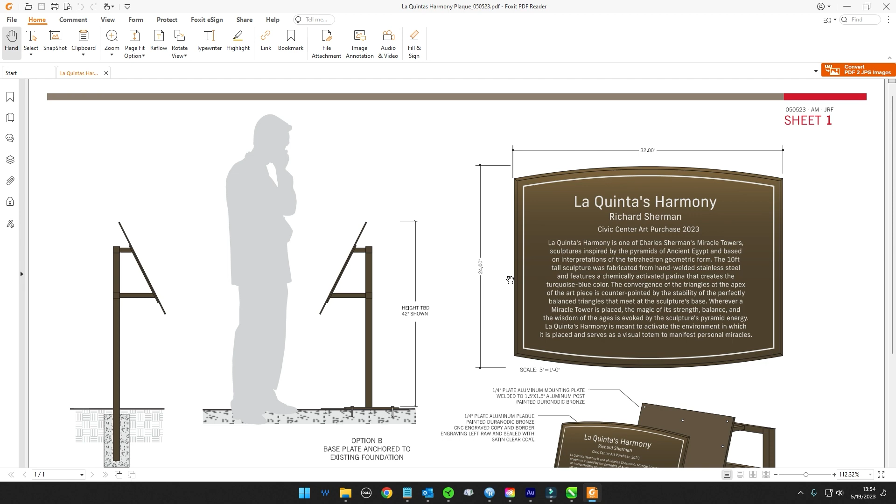So essentially I was given the full size file. What I do is look at our permit drawing to make sure all the numbers jive. I confirm things like our news media used to do, with at least 2 or 3 sources to make sure things are proper. So I got 32 by 24 on this thing. They want it to be 42 inches high. It looks like some kind of frame and something that's going to mount after it's painted, probably using some screws from the back.

I'm thinking 10 24. So I look at this first, and that's why I asked for a full size to be given to me by the designer. JR does a good job, he actually takes the PDF and gives me that, and it's to scale and all that, and I work in 1:1. So he takes this and full sizes it for me to make sure everything jives.

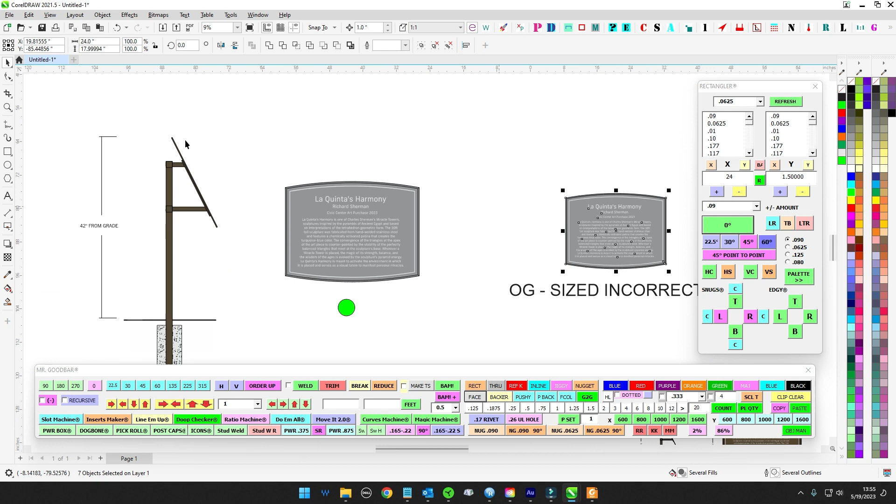So then what I do is take the full size and check the X and the Y, and go against it to verify, like Reagan used to say, trust but verify. I check to make sure the written numbers jive with what I see on the full size. This time, this was a little too small, this was 24 by 18. I'm seeing that it's supposed to be 32 by 24. So I went and asked him, and he said yep, there was a sizing issue. I checked that this was 24 as well, so I think we wanted it to be 24, but it wasn't. So again, asking for a full size that's verified, I can double check against drawings, versus if I'd just taken this drawing, who knows.

In this drawing, you can see this is still live text, and I might not have this live text. So that's why I want all my text to be flattened. I want it to be all curves, because that way I don't have to go find that font if I don't have it.

So anyway, now that we're here, we're in my play space, my workshop. I'm at 1:1, I have all my nudges, this is my default. So I copy pasted it out of the file he sent me, and I'm ready to get cracking. So I'm going to take my exporter here.

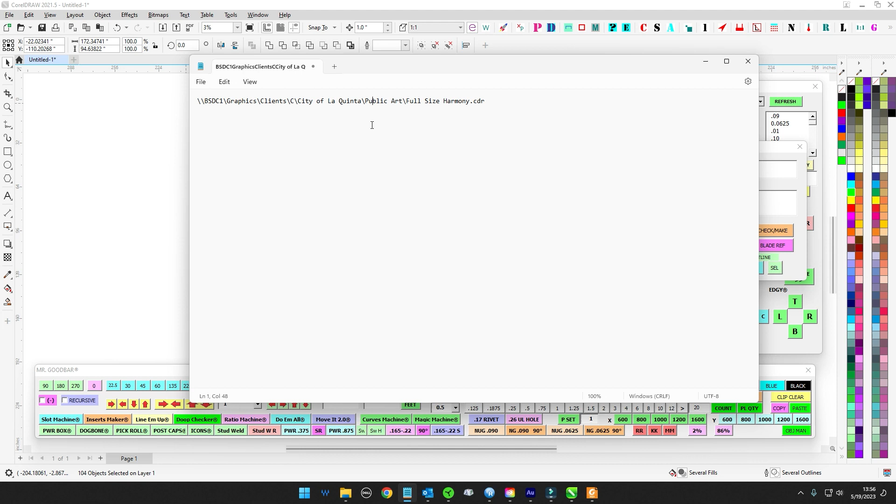Now I always keep Notepad pinned. We send each other hyperlinks of where the file is on the server. So I just copy paste that hyperlink into my Notepad. Notepad's awesome as a landing spot, a landing pad if you will, for copy paste, temporary quick stuff. So I'm going to go ahead and pull the file name, pull the job name out of this, just this simple.

I'm going to copy this and paste it right here into my exporter. And the exporter then, I'm just going to get rid of that, I don't need that. So now City of La Quinta Public Art is going to be the file name, part of the job name, and then this is the description of what it is. So I'm just going to call it Harmony Plaque, keep it lowercase, and use underscores for that part. Then I'm just going to hit save CDR and that's going to name it. So you can see, bam, it's saved and it's popped up into my homework file here.

So it's all saved, City of La Quinta Public Art, Harmony, and it puts all the date and everything on there. So that way we're good to go. I've got a video of this already if you want to watch it, but we can go over that some point later. So export it home, so now we're all set.

So now what I'm going to do is leave this as the page of record, so I know what happened. I've got this right here, I can always refer to this later, kind of like a non-destructive undo, but I'm just going to leave it that way so nothing changes.

So now I'm just going to take what I need. This is all I need here. I'm just going to copy it and paste it forward. I'm going to go to the left here, make a new page, and hit paste. So now we're good to go, and I'm just going to kind of work from here.

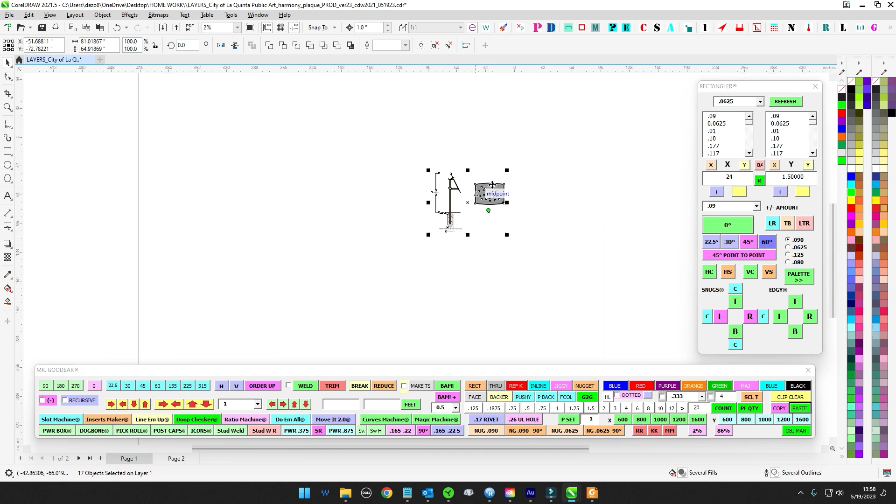First and foremost, I'm going to grab a fresh version of this that doesn't have all this stuff on it, because I don't need all of this right now. What I need to do is just dig out the main piece here. So I'm going to copy that and bring it over, and double check its size.

It's 31.9997, which always drives me crazy. And what I also like to do, since I'm working with somebody else's stuff, is double check the calligraphy. I have my properties docker here, and if I select this, I see that the calligraphy is actually set to 67 instead of 100. So I like to get that nice square, and it helps things when you switch it over to like hairline.

So I also like to work with a hairline here, so 0.03, and I like to get rid of any dash dot, whatever, so kind of clean up what they had. And I want to make sure that this is 32, so I'm going to switch that to 32, not 23. There you go, so 32 by 24 exact dimensions really helps out.

So now that we have that set up the way I like it, just keep hitting save, got to remember to hit save. And so now what I'm going to do is bring this down to here, and then I'm going to take this.

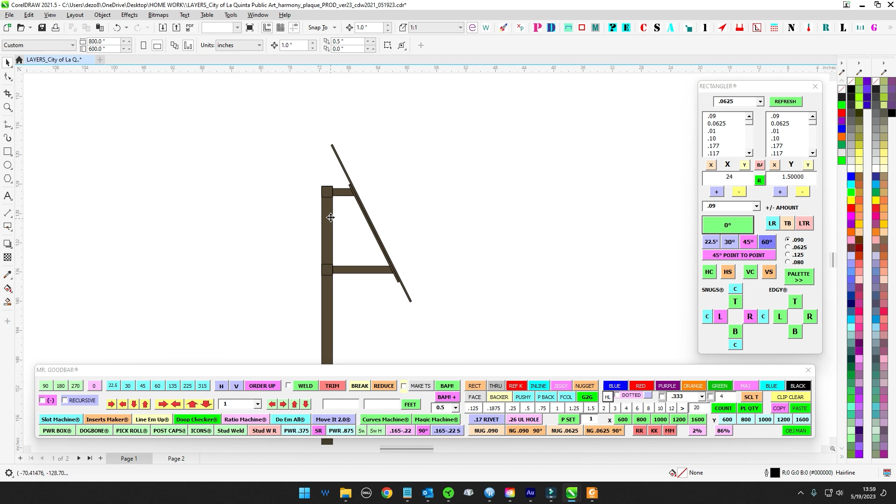And I'm going to recreate this, but I'm going to do it with my hairlines, with my stuff. So what I'm going to do is take this guy - you can see where, because it scales up, it gets kind of really funky, so I got 1.5000 whatever. So if I hit X and I hit Y, that gives me these, and then I can go ahead and clean that up over here on Rectangler, and then I can hit Y, that gives me 50, and then boom.

So I'm going to make this blue, we're going to make the frame blue, and I'm going to go ahead and put that there. Actually, you know what, we're going to get rid of that. And then now I have this, so that's 1.5 by 1.5. But if I just get rid of this and hit this, I get a square at 1.5, so I'm going to do that, hit blue.

And then I'm going to send that to the top and to the center, and then get rid of rubbish. So there we go. And then if I hit this guy here, how far is it? I can see that the Y dimension on center of these two is 10.599.

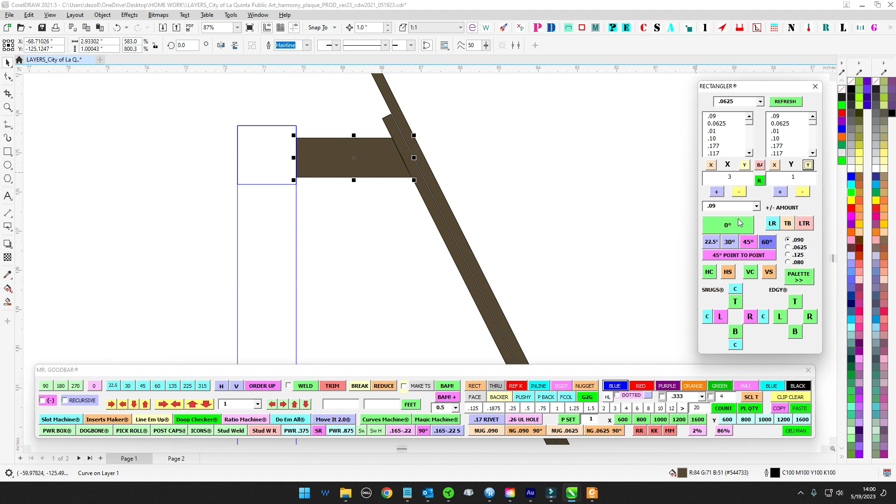It's kind of sloppy, so what I'm going to do is recreate this guy. So we've got 2.93, so I'm going to just hit X and Y, clean that up. If I hit the Y here, it cleans it up to 1. If I hit the X, it takes it to 3. So now I have nice even numbers, a little stick here.

Let's go ahead and make that purple just for differentiation purposes. So I'm going to get rid of this, and I'm going to go ahead and put this in the center of this tube there. And now you can see where that's kind of where we want that. We're looking good there.

Now what I'm going to do is take this and center it up. Actually, we're going to do this one first. I'm going to run this down and get even numbers. I like 11 - 11's a good number. I don't know why, but I want 11. I like putting 11 in some of this stuff. So we got 11 on center.

So I'm going to copy this, bring it down, because I'm going to be trimming this anyway, so I'll just extend this out. Just like that. And hit save. There we go. So now I have these two verticals. These are at centers on 11 each other. We're coming out this way. We're looking good.

And now that we have this, I'd like to know what this is right here, whatever this is. So if I just draw a line there and hit Curves Machine right there, we can see that that's 0.99. That distance right there is 0.99. So we're close, obviously close to an inch. So what if I were to just poke this up an inch that way? We do an inch this way - looking good there.

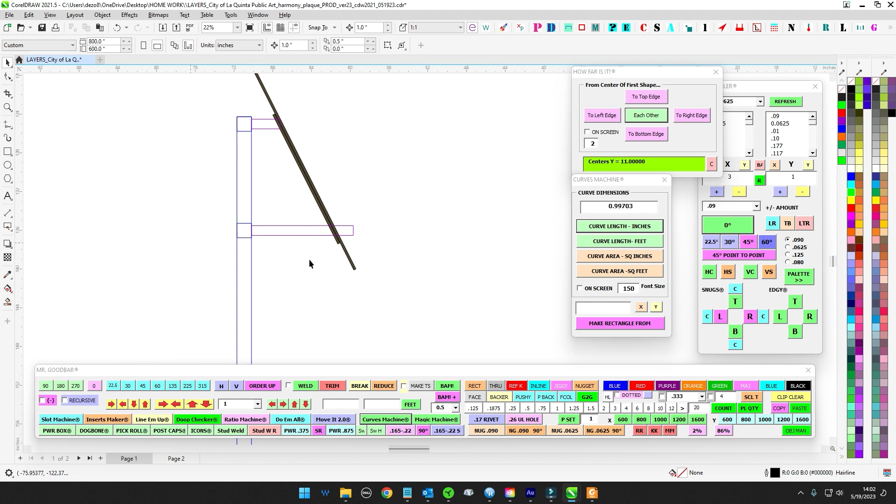So now we need to transition, because now that we have this built more to even numbers, everything's kind of nice and even. So this is going to be 3 inches in from there, and then this will be whatever this is. At some point one of them has to win, so you're going to have either a funky number here or a funky number there when you're dealing with this.

Now speaking of funky, I guarantee you this is going to be at some weird, strange angle. And if I look up here, it is 26.75. Again, we're all about making things easier in the back shop. The chop saw you get has demarcations for each degree, so the chop saw is not really good at doing fractions. You can't go to the space on a fraction.

So what I like to do is take that and even it out so it's easy to work with. So we know we have our real size here. We need to make this actually be 24, and then we need to figure out what this piece is going to be next. So what I like to do is grab this - thank you for your service, don't need you.

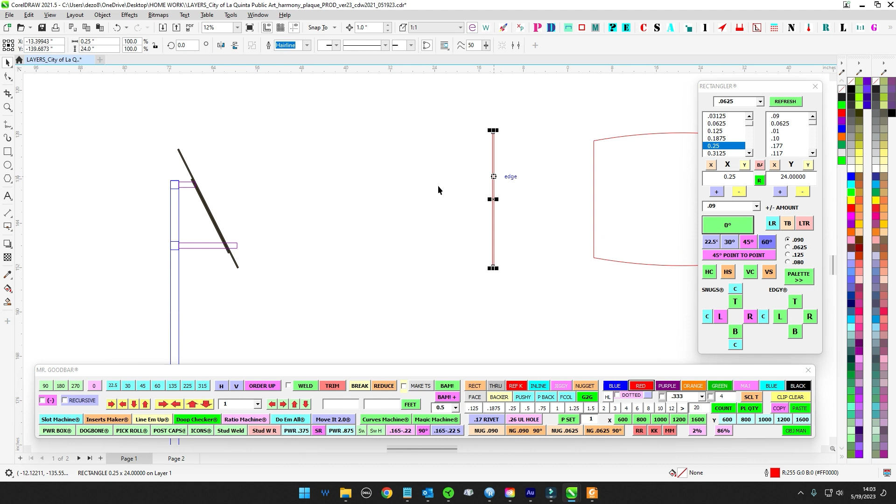So I hit Y, that gives me 24. I scroll down here and I get 0.25. So this will be our side profile in red, and we can just even that up. So now this needs to go here. So let's check this degree.

So we have 26.75 degrees. So what I like to do is grab this and then hit my go time here, I hit my degrees - this is my minitator. This is a rotator machine that just keeps this loaded up, because when you're dealing with rotation in Corel, you have to retype up here like an animal all the time, and it only goes counterclockwise.

So if you go 26, then that's fine. If you want to go negative 26, you have to actually type negative 26, or do math - 360 minus 26, et cetera. Whereas the minitator here, you just load this up. So I'm going to type 26, and now it stays that way.

And now I can go left or I can go right, just that easy. And then I can either do everything all as one, or if I have a bunch of things, they will rotate 26 degrees on their centers - so that's kind of cool. Let's say I want to take this - if I select this all as one, it rotates as one, versus if I do it like this, each one rotates on its own center where they are. So a little bit of undo there.

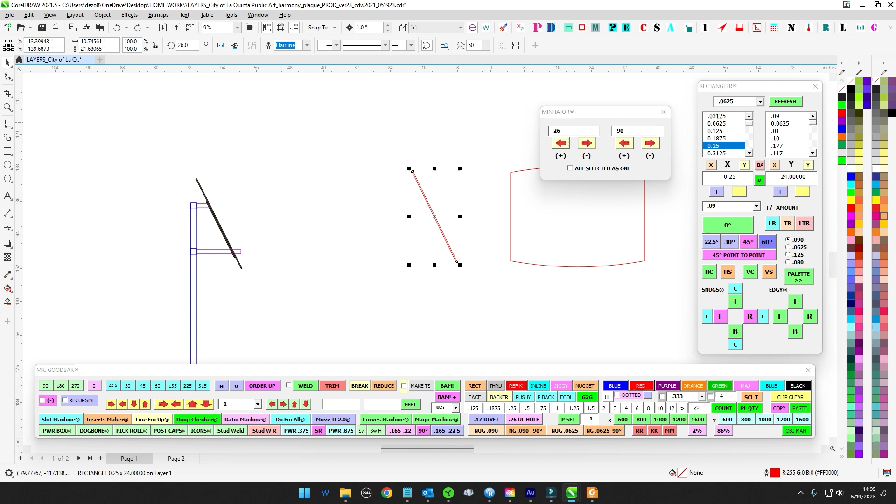So there you go. So now that I have this set up for 26 degrees and it keeps it even, what I like to do now is I can do Launchpad and type in 26 degrees. If I hit this little button here, that gets me a degree mark, and I'll hit go - that puts it on the screen for me. So now, even if my minitator closes or whatever, I just remember that I'm at 26 degrees.

That's what I'm working with, in case this changes. I just know that that's 26 degrees. Okay, so now that we have the real size of this at 26, we need to match it up to what's existing and get rid of the funk. That way we can get these set, get everything lined up, and get screw holes lined up and make this plate, lay it all out. So now what we're going to do is a base plate.

Let's do the base plate next. Now that I know we're at 3 inches here, let's copy this forward, get it out of here and get it cleaned up. I know that this is where the base plate wants to be. So what we're going to do now is grab this, all selected as one. Let's go over 26. There we go. And now what I can do is get this out of the way.

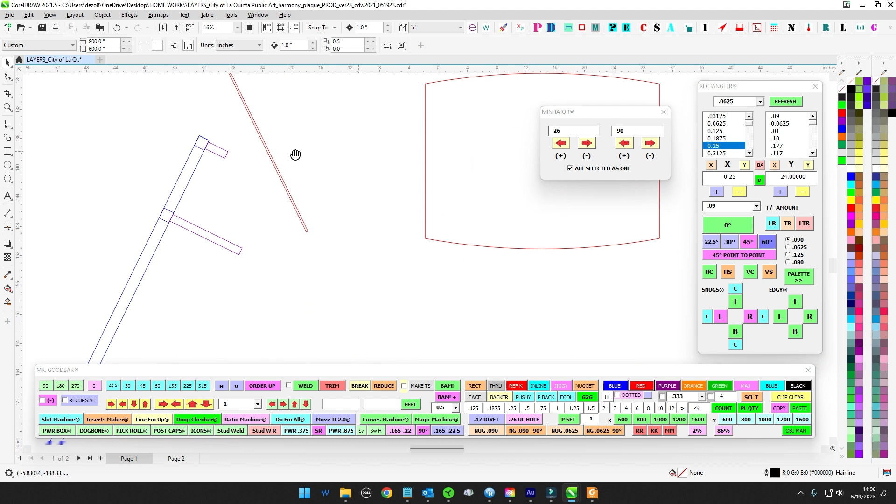Since we know we want to go 1 inch further up from here, actually, you know what, we want to trim this. That's what we want to do. So we want to take this and make like a little trimmer thing. We want to go 26. That's what we want to do. Go like that, bonk it right there.

And then I'm going to take this. Actually, I want to do this at the node, much more accurate that way. So I'm going to take this, I'm going to trim it. There we go. And then I'm going to take this and bonk it like that up against there. And then I'm going to take that and trim it. That's what we want to do. There we go. So now this should be 3 by 1.

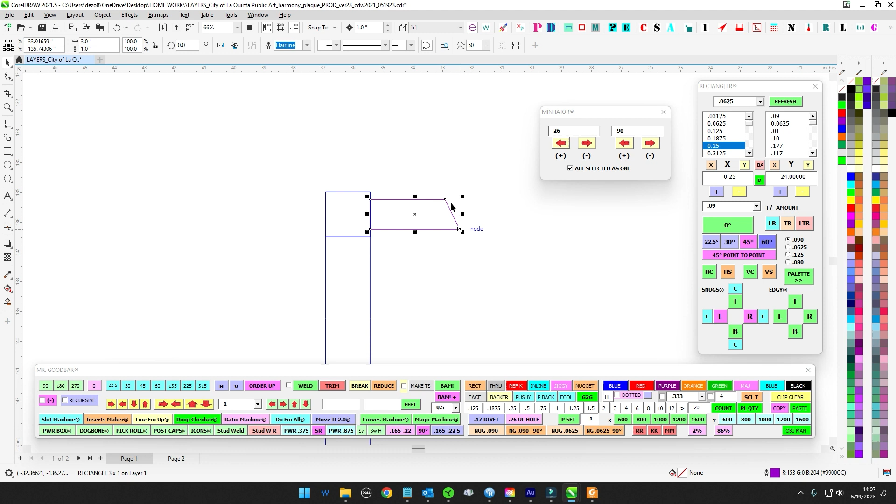So this measurement right here will be nice and easy for fabrication to start with. They can cut this at 3 inches to the long side and then just go 26 degree cut on the chop saw. We're set up for success. This guy here is going to be .36, so we're very close. You could just say shy 3/8, and that's going to be good enough for what we're doing here, because once we weld it, it's all going to be fine.

So now what I can do is group this and we'll tilt it over. Now we can make this plate because we have that size. So I'm just going to reuse this and put it right there. Click.

Make sure you've got your constraints when you're doing what I do. I was just talking to one of the designers at work. I work with the highest, like the quickest. You can see how far away my mouse is before it hits all the way out here. That's what you want when you're doing what I do. You want that Duplo blocks, the big Legos snap. You don't want to be waiting until it gets all the way here before you grab a node. You want to be able to be way out here. Look how quickly that grabs that node. I'm already working with this thing all the way over here. That's really important when you're doing this, because you just snap to, and you want to snap to as quick as possible. You can almost feel it pull over.

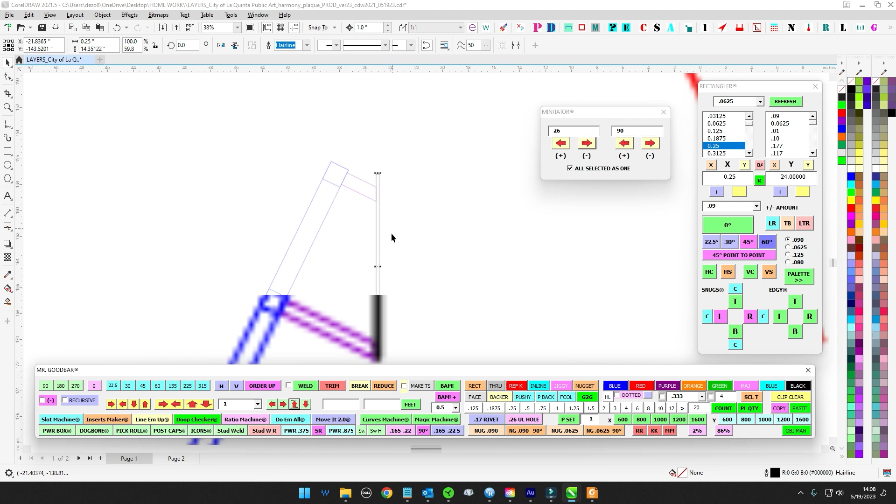So anyway, what I want to do is grow this by 1. We're going to go 1 inch up, and then 1 inch down. So now what I did is I took that piece, made it grow 1 inch. So now we're 1 inch from there and 1 inch down. So now we're kind of close to what we got here. And I'm going to make this orange just for fun. Okay, so this interstitial piece is orange.

So now we got this laid out. Now we can tilt back. And then what we need to do now is get this lined up with this where it is here to try to match that as close as possible, right? So what I'm going to do is group this. And this is where it's not going to be perfect, but we're back to 26. I'm going to get this lined up there, and I'm going to bring this out so I can just do a guideline.

And then I'm going to guideline here, and guideline here. Now I know that's not exact, but all of this is pretty close.

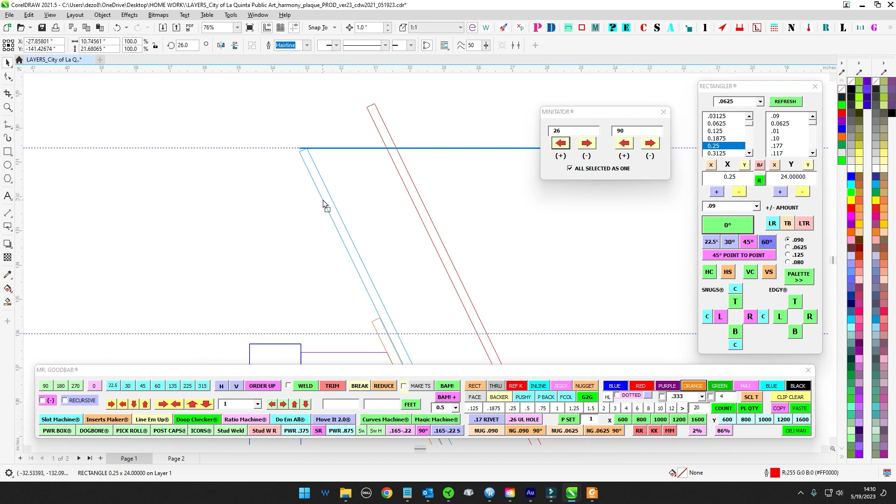So now what I'm going to do is take this and get it as close as possible, because it's really difficult to get that to slap against while it's moving. There are ways to do that, but I'm going to get it close, then tilt the whole thing and get it smacked against there. So I'm going to go like that. That's pretty dang close to where I want it.

So now I'm going to take the whole thing, select it as 1, tilt it back to 26, and then go ahead and go like that. Then I'm going to do a guideline like that, tuck it in. Now I have intersection. That's the size there.

And I'm going to go ahead and delete all my guidelines, get them out of the way. Then I'm going to grab this, tilt it back 26, and we'll see where we're at. So I'm going to line it up the bottom there. That's well within spec, it's looking good.

It's what we want, we have everything lined up. So now we come over here. And then what I'm going to do is get rid of that just in case, because we can always go back to it here. That's the old busted, this new hotness. And we've got all this we can always refer to.

That's what I'm talking about. Yeah, I know I just got rid of that, but really that was super redundant. Sometimes it can get a little too crowded if you're saving too much stuff. You become like a vector hoarder. Trademark, you heard it here first.

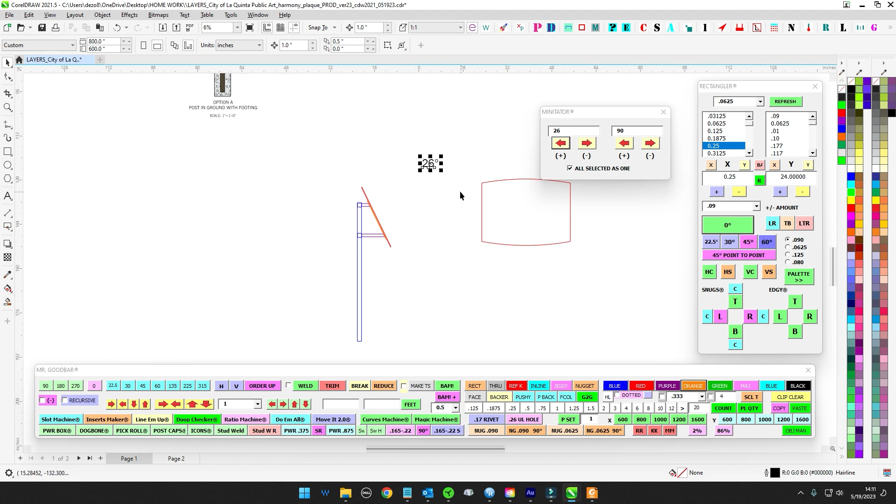All right, so now what I need to do is transition, because Corel only works like this, X and Y. When you're dealing with an angle like this, things are weird. So this is a different perspective than this. So I need to get this laid out X and Y on full size this way.

So what we do, simple enough, I'm gonna go ahead and group it and then tilt it back 26. And then we're just gonna line this up, since this is 24 and that's 24, we're just gonna line that up with the top of that. Just to make sure, I'm just gonna go ahead and hit top. Okay, so now this is lined up with that.

So now we just need to transpose this plate over to this plate, set up all our holes, and get a spot where these guys weld in, all that stuff. And then the next thing we'll be doing is our cut list, get a cut list set up for fabrication, get these all set up to route. So we're good to go.

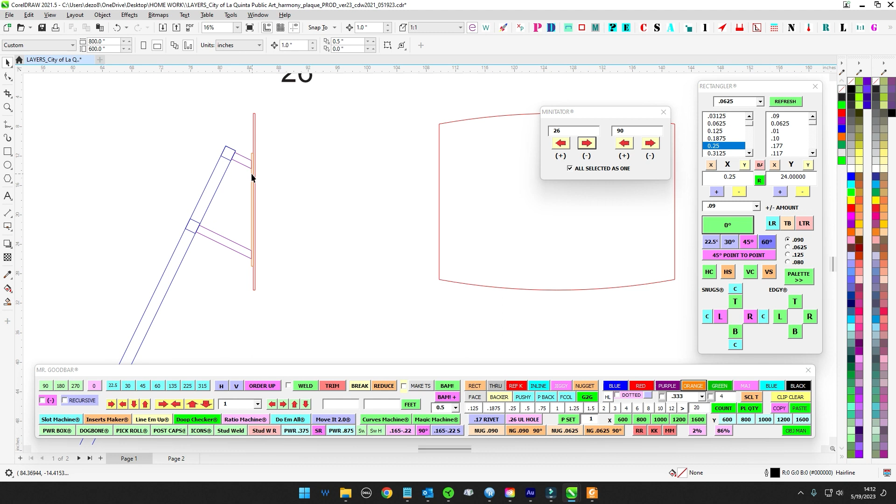So what I'm going to do is transfer this. I'm going to go ahead and ungroup this for right now so I can work with these. And I'm just going to be lazy, and just copy this and smear it across like that. Bam.

And then I'm going to clean it up with an X and a Y. This is supposed to be 32. I don't like it like that. So I'm going to do like this. We're going to center it with that, but then make sure we are centered with that. There, okay, so that's that plate.

I'm going to make it orange so it matches that. Actually, that's kind of close to the red, isn't it? Let's make this purple. There we go, good differentiation. See, I like to have that color contrast.

So what we're going to do is take this, and take this, and I want to see what this spacing is here, because that way this spacing can kind of go around. So it'll look like that spacing comes around and looks good. So how far is it from this edge to this edge? We're looking at 3 1/4 from here to here.

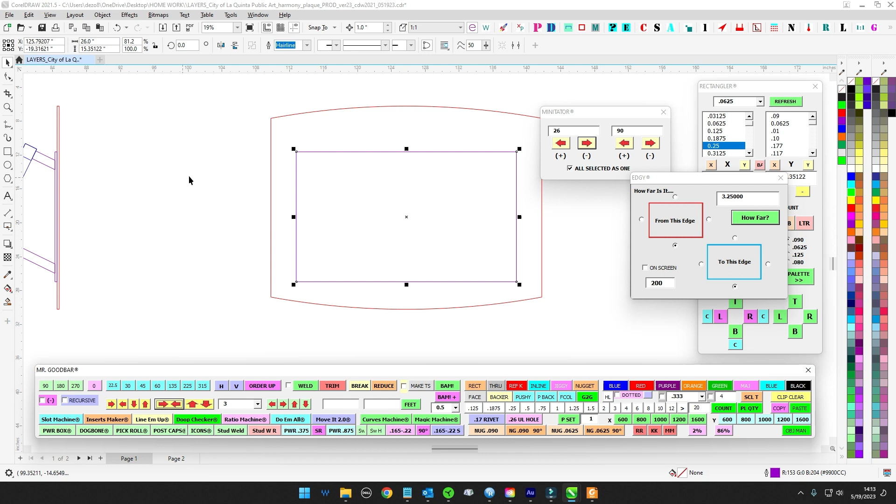That's looking pretty good. So if I were to bring that in, let's say 3. So what I'm going to do is shrink this 3, both sides. That will be my mounting plate. So you can see there it comes across here. I kind of like that. So it's sort of this and it comes around. I think that'll be a nice look.

I know other people are like, why don't you just follow the bottom, follow the bottom. It's fine. Looks good like that.

So now what we do is we need to transpose at this angle, this distance, because this is longer than 1 since we're cutting at an angle. I'm going to go ahead and transpose where these lie on there.

So what I like to do is take this, duplicate it, bring it over here. If you hit the word break, it'll break it apart. And now I just have this. I can get rid of this as rubbish. So now this gives me my Y, which is 1.1125, blah blah blah. And then I know this is 1.

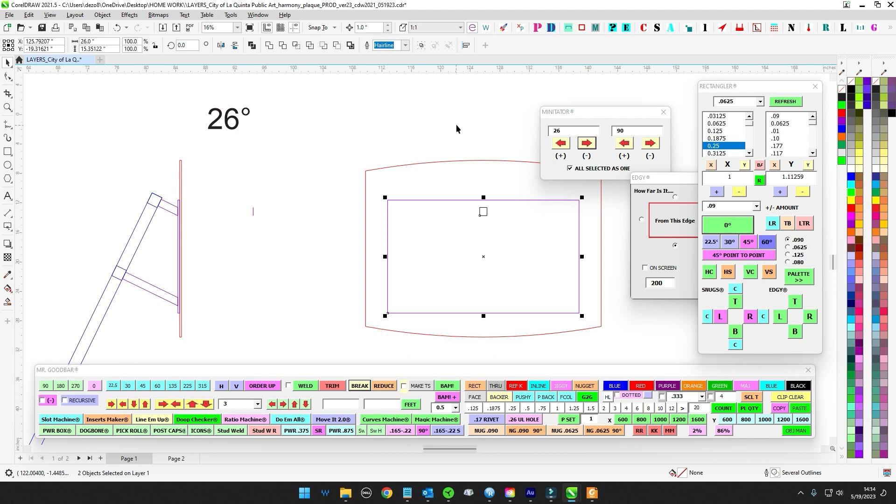So now I have the profile of this post here, right? And then I'm just going to center that up there. And then I'm going to just spread that out a certain amount.

Now I notice that they don't give me any measurements, but I see that these posty things here, that's a 1x welded to the 1.5 inch inside a little bit. So we want that kind of look, and we're going to go for that right now.

So we're kind of building up this frame as we go. I think 10 inches apart, we're looking good. So I'm going to go ahead and bring that down to match where this guy is. But let me do a quick match here with that. So boom, like that.

Line up, get with your buddy. There we go. Okay, so now this is where that post goes with the stretch because it's at an angle, and that's where those go. So got that laid out.

Save, save, save. No crash, no crash.

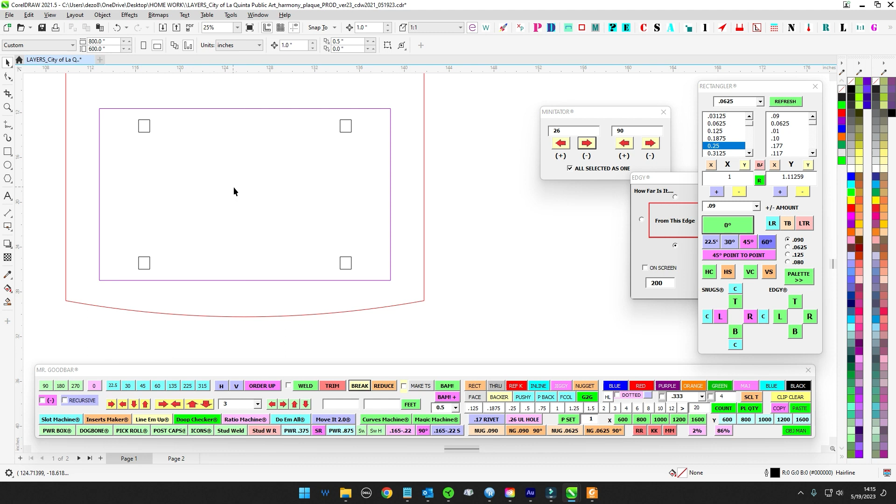And then this also gives us a good spot. We can go here for our screws for mounting this thing. Gives us plenty of space in here for screws to mount this. Whether we put some in the center, not sure. We'll figure it out, see what we got.

So now what we do is we want to kind of score this for that particular thing. So I'm going to go ahead and off to the side, make this thing. What I like to do is a 0.03 oversize, so that gives me a 0.03 bigger. It's basically a business card all the way around because no extrusion is exactly 1.5 inches or 1 inch by 1 inch. So I make that bigger.

And then what I do is I call a channel tag, that's what they call it. So I hit my channel tagger and we're going to use, let's see what a 5/32 looks like. Yeah, that's good. So we'll do a 5/32 bit.

So I'm going to go ahead and make sure that I pass that on to our route guy. So I'm going to make this red. And then I'm going to go ahead and do an inline because I don't want to spend the time to carve this all out. I'm going to do what's called an island fill. An island fill is when the router scores down and removes all of this material.

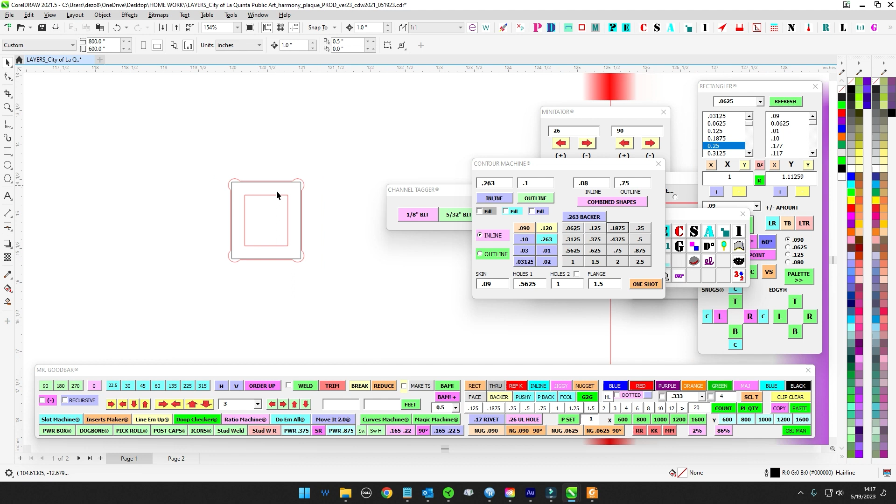But to save a little bit of time, I'm going to go ahead and leave some of it because we're just going to have a 1/8 inch wall tubing. So I'm going to do a 3/16 inline, just like that. And then I'm going to make that red as well. And there we go, so that is going to be my route down island fill.

Now I'm going to go ahead. Now, when you export in DXF, it breaks things apart anyway, but I'm going to go ahead and combine it now. And I'm going to give it this purple color right here. I like that.

So now what I'm going to do is just take that, duplicate this. I'm going to leave this in case I need it. Now I'm going to hit do them all. Getting a little bit crowded here. Thanks guys, appreciate it, don't need you. We'll keep you though, but we'll get rid of you. Don't need tagger anymore.

So now what I'm going to do is hit OG shape, and I'm going to hit these as copy onto. I'm going to go apply to all shapes, and that's going to give me on center a copy of each of those. So we're good to go. I'm going to save that.

So now we'll have marked out places where these guys slot in, where that goes. It's definitive, we have nice on center, even numbers here - 11 inches on center. That way when the guys lay this out, it'd be simple for them. We have a nice even number on the chop saw, so that way they can go to 26. Easy, nice and easy there. So that way that's an even number there.

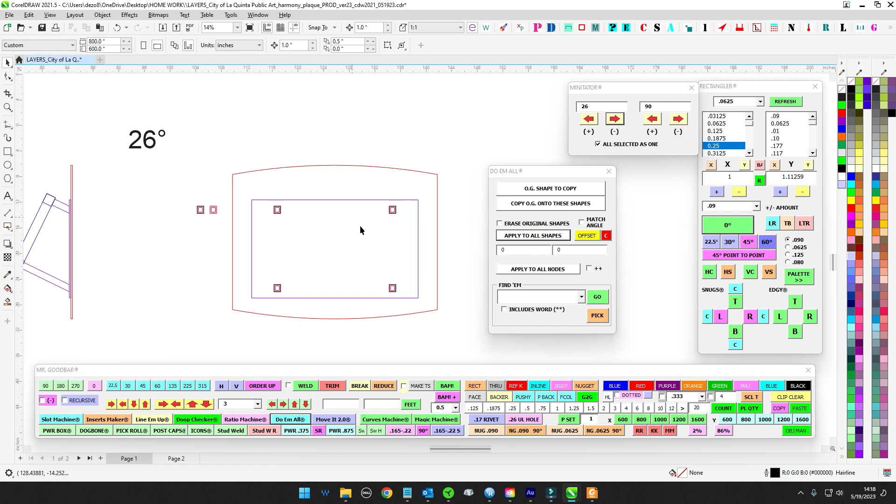So we're closing in, now let's do some screws. I'm going to do 1024 tap. I'm going to go ahead and do over here. I have my taps all laid out, so I have 1024 aluminum. I hit this button and it's going to go ahead and put on there the right size for a tap, and also it names it. See down at the bottom left here - so I have tap 1024.

So now what I'm going to do is I'm just going to put this to the top and right, and then I'm going to come in an inch. See how it goes. Again, setting up your nudges for even numbers like that just saves so much time and energy. So I'm going to go ahead and just add a couple here, and then I'm just going to align and distribute and see what we got.

So 6 inches apart might be a little too many, so I'm going to get rid of one, and then I'm going to hit it like that. So that puts us at, I'm looking up here, that puts us at 8 inches on center between these two. I like that, not too many, but we want to have plenty. We want to make it as inconvenient as possible to abscond with this thing, take off with it.

So we're going to go ahead and just add that, and then I'm going to go ahead and just add one here, and I'm going to add one here, and then I'm going to hit vertical centers, and I'm going to hit vertical centers. Good to go there.

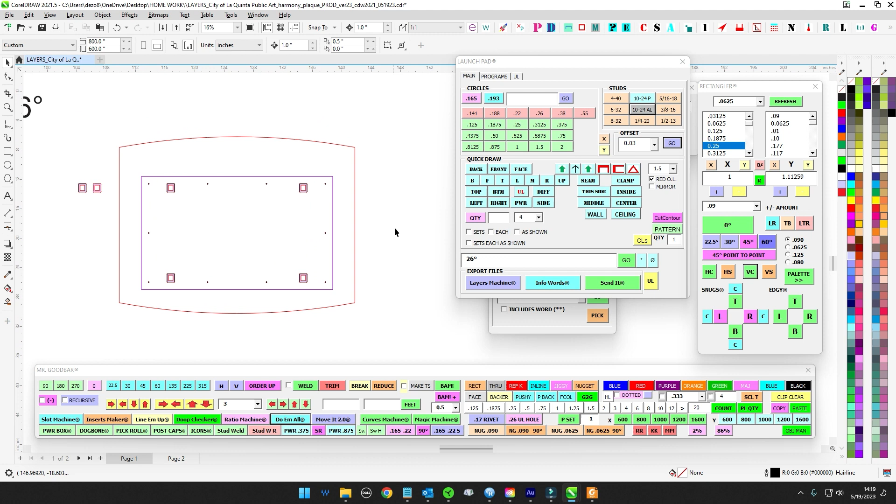Whether or not we need to have one in the middle, let's just go ahead and do that. I know it's a pain in the butt, but let's just make sure we got this thing really locked down. In case it's cupping in the middle, we can try to pull it, so might as well - again, try to make it as theft-resistant as possible.

So now what we want to do is we need to now flesh out this frame, because I know what the sketch looks like, but we need to know where this frame actually exists here. So what I'm going to do is I'm going to copy this, duplicate it, come over here. Thank you for your service, we'll put you over here. Thank you for your service. Now I have my rotator here.

So I'm going to hit it back to 26, and now I can start building this frame. I'm going to go ahead and ungroup this. Let's see, we're going to ungroup, right? And then I'm going to take this.

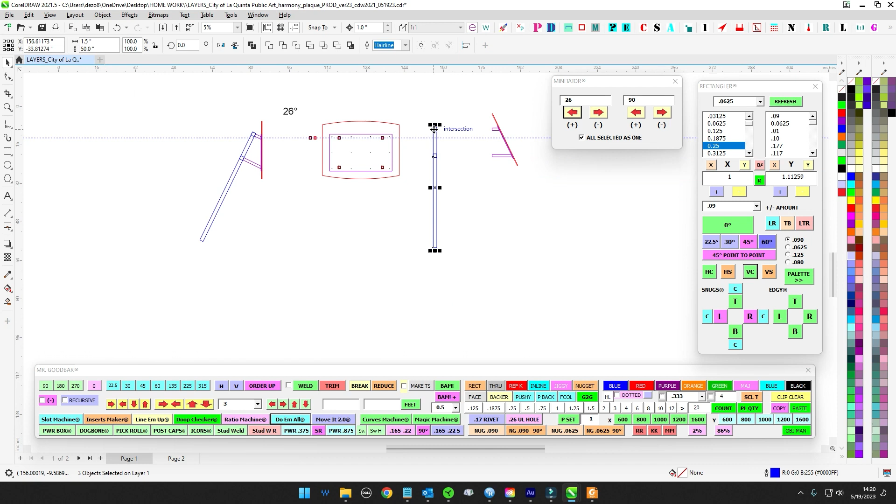And we are going to come down here with this, because basically I can't build the frame off of this because this is at a weird angle. So we need to go back to this view, right? Oh, this didn't duplicate - I wanted to duplicate that, I don't want to take it apart. There you go, midpoint, so that's what I got.

So we got to bring this down, and now we have a side profile here. We are going to build this frame out so that way it corresponds to what we have here. But remember, this is stretched out - it's not at perspective like this is.

So in order for this to look like this, we have to take this, group it, and then basically stretch it to the bottom of this, and we need to stretch it to the bottom of that. And you can see where it gets all squishy and squatty, but when we do that, this gets pretty close to 1 by 1. So it kind of checks out, right?

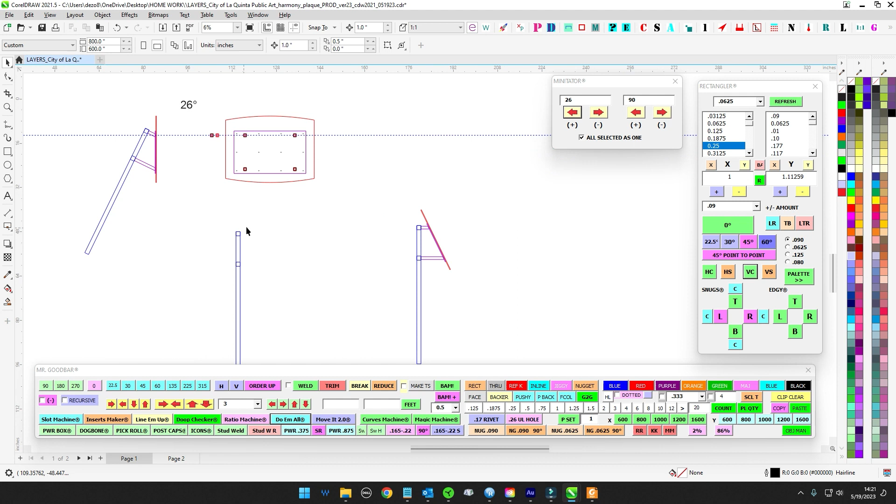So this actually, if you're looking at it at perspective, is squished - it's 21.6, but that is the size that it's supposed to be this way. So that works out. So what I'm going to do is I'm going to group this, and I'm going to center it here.

And then what if we were to put it to the edge of this, and then we would take this and put it to the edge of this. And then we ungroup these, and we can actually just use this and drag it, and there's our cross. And we can take this and drag it, and there's our cross.

So I think the frame would look good if it was the size of this purple, but we're looking kind of chubby, kind of big. And also, why are we at 26.5? Can't be having that.

So we want to bring these in to the edge, make sure we are lined up. There we go. So I'm thinking, because we have these where they are, now we want to represent these little tubes, right? So I want to bring this over here, actually.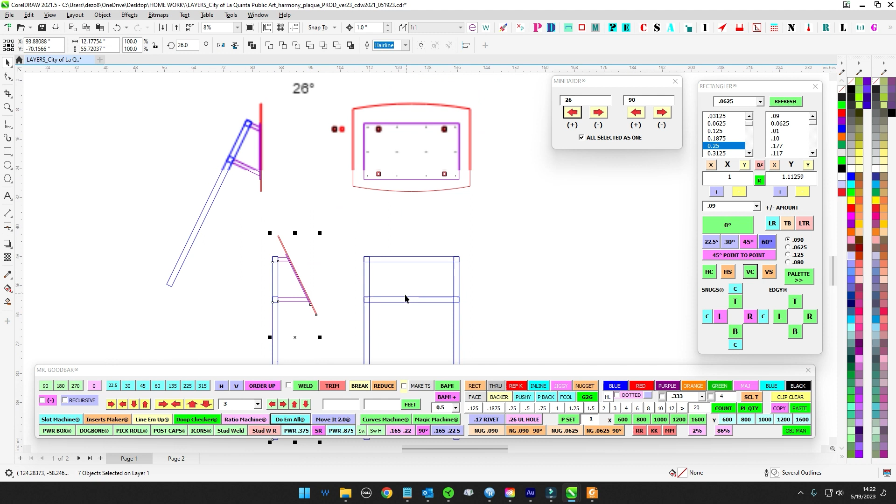Okay, so now we want to represent where these tubes are, here and here. So I have a tubing maker. Come up here, push this button. This is tube maker. So if I hit 1 by 1, 1/8 inch wall, which is what we're using, aluminum square tube, we know that's purple. So let's keep it in the same family so we know what we're dealing with component wise.

So we want to line it up there, and we want to line it up there. And then we want to line them up here. See, this is how you just mirror your X and Y, makes it easy.

Okay, so now here's the posts. We're looking directly at it. This is where the posts are on the 90-degree X and Y versus on the angle. So on the angle, they're represented here, stretched, but here, this is looking right at it. And I'm thinking that's looking pretty good.

It's all even numbers. Again, that's what's important. You want to work with even numbers because, again, Stanley Fat Max tape measure is not friendly to measuring big old weird stuff. So on center, again, something happened here where stuff's getting a little bit funky, but we're close enough to 9 here.

So what if we were to center that up? And we want to go 9. 1, 2, 3, 4, 5, 6, 7, 8, 9. There we go. So we want to center that up with that. And then we want to center that up. 1, 2, 3, 4, 5, 6, 7, 8, 9.

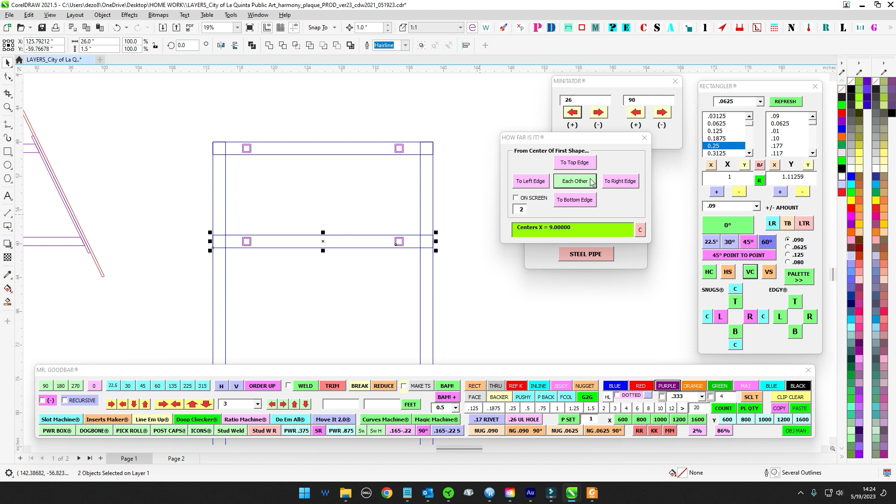Yeah, 25.8, whatever. Yeah, we don't want that. See, it helps to have this all measured out because later on, I'm going to be shooting numbers off of this, and I just want whole numbers.

So we're good to go. So now the frame's represented. So now what we're going to do is just drag this over. So what I do is I'll hit my move it here, and I have this already set for 1.5 inches. So I'm going to grab this node, and that's going to give me a 45. And then I'm going to move this down 1.5 inches. I'm going to grab this node, move it down, and I'm going to grab this node, and I'm going to move it over. So now we're good at 45.

And then same thing here. I'm going to grab these nodes. I could shrink this, or I'm just going to grab these nodes and move them 1.5 inches. And so now I have my parts.

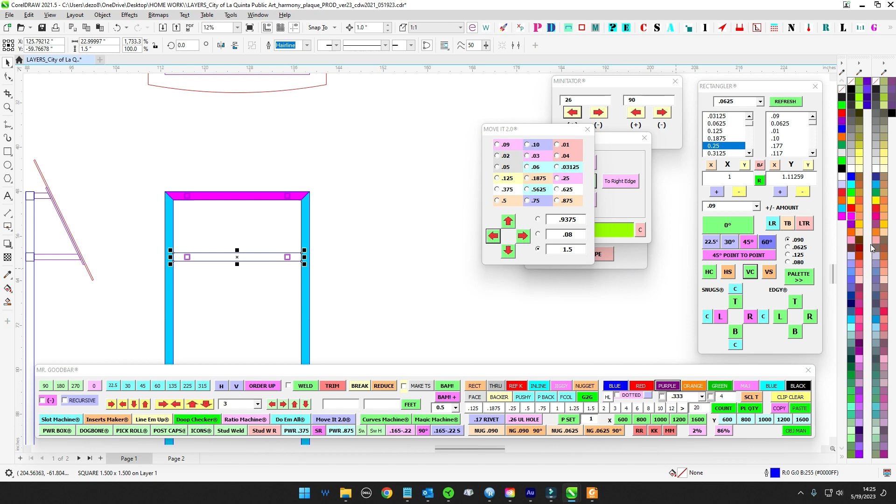And so now that I have my frame built, what I like to do is color code it for the guys in the shop. So that way pieces that are the same, they see how it goes together. So I'll go ahead and let's do light blue for these, or a blue like that. That's for the longies. Crossbar, we'll throw, you know who you are, throw a magenta on there. And then I'll do an orange on there. So these are all the ones that are different shapes, different colors.

So then what I like to do is I'll take this and break it out and give them measurements. So now, is 50 enough to go into the ground here? We want to make sure. Usually I like to give a little extra because the guys for install, if they want, they can chop a little off. It's a lot more difficult to add in the field than it is to chop off.

So I might actually, because we want 42, according to this, 42 from grade. So if I type 42 here and make a rectangle, and I go ahead and make that to the top of that. This is our grade line.

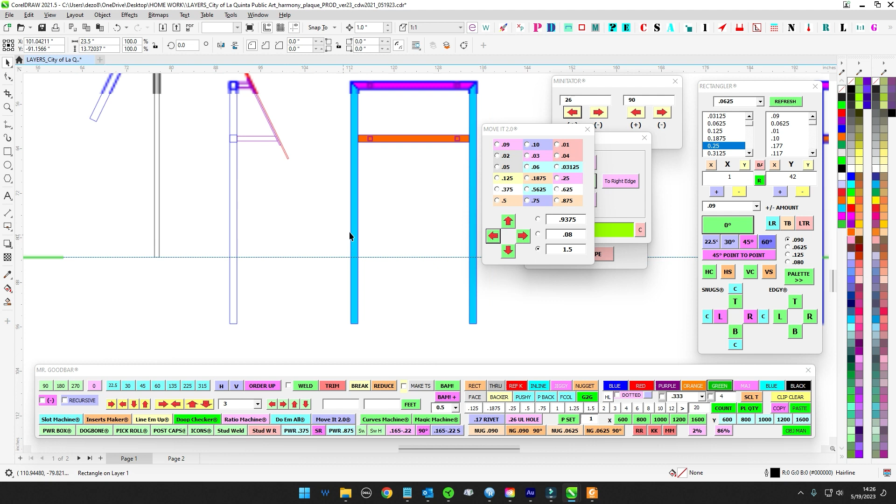Let's make that green. So if this is our grade line at 42, we've got 8 in the ground, which is probably okay, but we want to make sure this doesn't go anywhere. It will be rather top heavy. So I'm going to add 6 inches since we're at an even 50 right now. That's a little better. That way they can dig around and make a nice big heavy concrete footing if they want, but make sure this thing is anchored in there, because it's going to be kind of heavy and you don't want it walking off. Now that we have the frame laid out the way we want it, we can go ahead and hit Sizes.

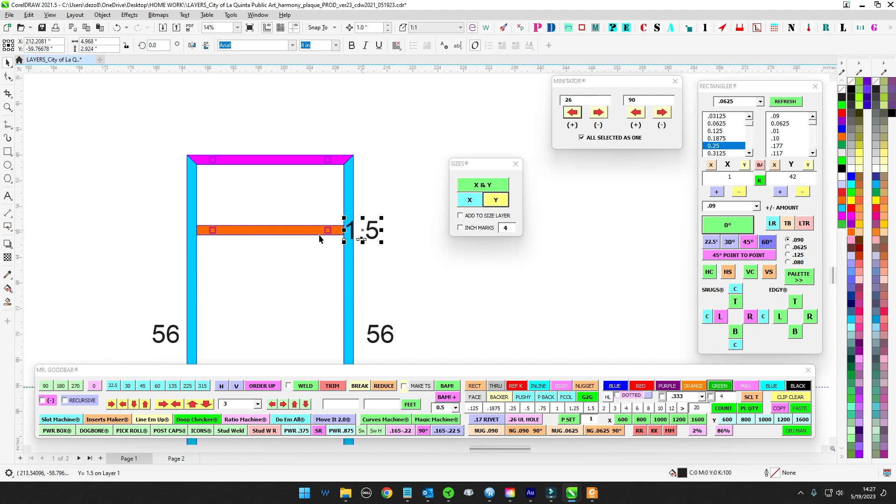So I hit S up here to get my sizes. If I hit Y, that gives me the size in inches. This is why it's important that these are all even numbers. See, like here, 22.7 ended up not quite there. This is supposed to be 23, but I'm getting this for my X, and I don't want that. So I'm going to load it up into this guy here and redo this. There we go, now I hit X and get 23.

We're going to switch that to a 2-inch font, and I'll change all of these to a 2-inch font coming out after this. This is 26, that's great, so we're good there. Then what I like to do is make a rectangle here, hit Y.

That gives me my spacing in between. Then I'll hit break - that gets rid of all these and leaves me with a line segment right here. If I want to put arrows, I hit this and make it like that. Let's make this a little bit smaller - do this at 0.1. That's better. Okay, so I got 9.5, boom. Let's make this orange again.

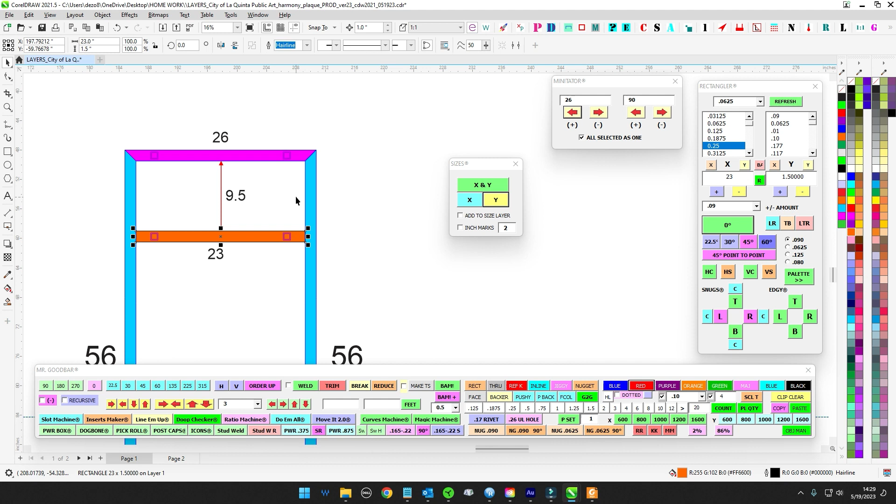That's it, so I got this laid out. This is where the 23-incher goes, I got 9.5 in between. It's easy for the guys to measure that - they know that all of this is 1.5-inch tubing. 26 across there, 23 across here, 56 total there.

Next, what we're going to do is make these two. Next, we're going to break this out into a cut list for the guys. So we're going to come like this, and what I'm going to do is just rotate these, take these, rotate these 90 degrees. I'm going to flip it this way.

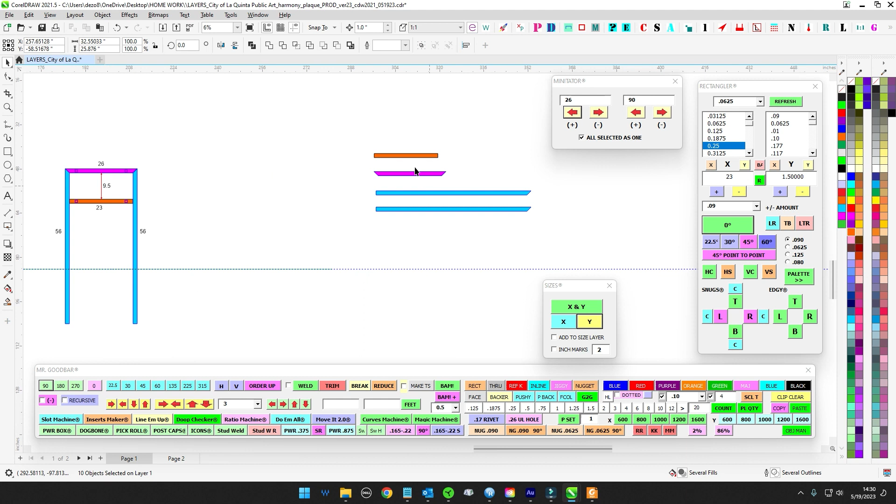I'm going to go like that, keep these. All right, so there's my cut list. Move up 1 more inch, just to give me a little more room. Okay, that's for the frame, but I don't have these guys yet - don't forget the 1-bys. So now I'm just going to come over here and grab these guys like that.

I'm going to come over here and we'll give this guy a cool color - he's going to be this color here, and you get to be this color. So what I like to do is make sure that they understand that 3 is on the long side, and that this, unfortunately, will be your weird color or your weird size. I try my best to avoid those sizes, but there's really nothing you can do.

And then what I'll do is type it out real quick on my stencil machine here, and I'll note it's on the long side. Just to be clear, you know - sure, they're fabricators, they probably know, but again, never assume.

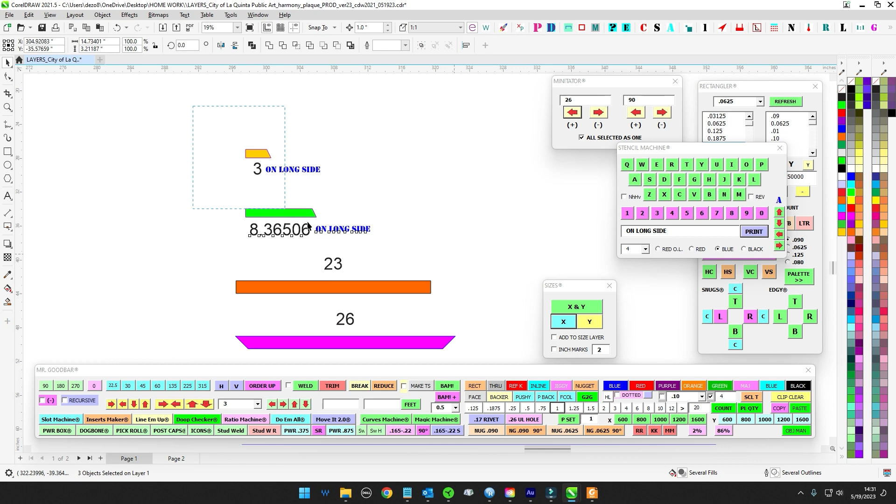There you go. Now I'm going to make sure that these are out of the way so there's no confusion. Then I'm going to use my launch pad again and go ahead and hit 26 degrees. Not to be confused with 98 degrees. So that way they know that this is a 26 degree cut, 3 inches on the long side.

Actually, this is kind of confusing here. I'm going to flip this like that, and bring this down, and put this on the top. There we go, that's better.

So 26 degree, 26 degree. We've got 2 of them. Quantity 2 and quantity 2.

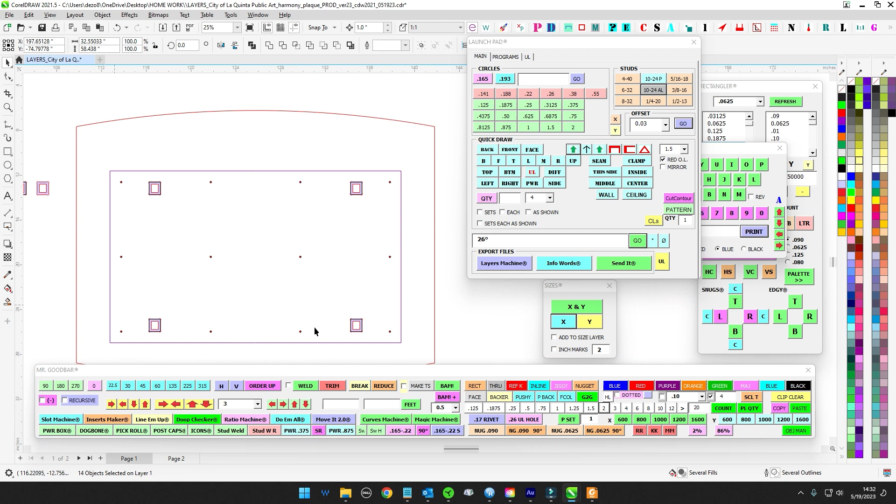There we go, cut list ready to go. And so frame layout's ready. Actual parts, everything there. We got our screw holes, everything. We got their plaque ready to go. So what I want to do is name this. This is curve. I'm going to make sure I have everything named and ready to go. This is going to be a rectangle. So I'm going to make 3 shapes out of that. But we have all that ready.

So now that I have my launch pad here, you can see what I do. I just go 1.5 by 1.5 by 0.125 T for wall thickness, aluminum square tube. Go. And that goes ahead and puts it on the screen for me, right? And then I'm going to just get rid of this. I'm going to get rid of this.

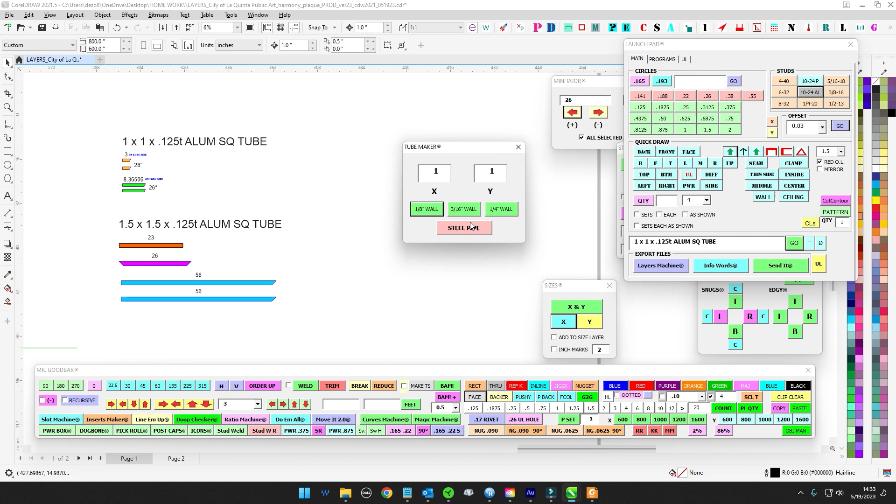Good to go there. And then what I like to do is just take my tube maker again and hit it with a 1x. It doesn't have to be to scale, but I like to put it here. That way we know for sure it's square tube, just visual design looks good. If it's a round tube, then I hit that and it'll make a round tube like that. So depending on how I want to do it, it's very clear, very visual that it is aluminum square tube, and that's the size.

3 inches on the long side. Hopefully they can figure out that's close enough, 3/8, et cetera, et cetera.

Now what I'll do is I want to make a round. I'm going to make a PDF out of this. So if I hit BAM! Plus with 50%, that gives me a nice little square like that. I'm going to minimize that down to more of a 3%. I'm going to select that. There you go, I like that right there. Then I'm going to hit this, and give it like a 2 inch border, there we go. I like that. Then I'm going to hit my symbols.

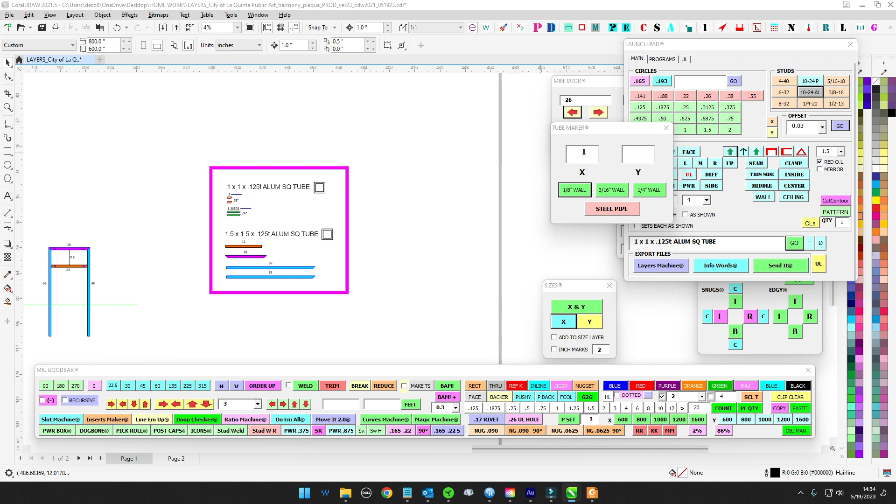I want Edgar to pay attention to this because he's going to chop this up. Inside joke there, but Edgar, looky, this is a little fat. I'm going to just hit that with a 1. That's better. Okay, so now this is going to help me break this out into a separate PDF very quickly. Show you how to do that.

But that's the cut list we need for this job. We're good to go. So it's time to start breaking out parts.

So I'm going to take this, duplicate it over, and then duplicate this over. We're going to get rid of this because we don't need that. And I'm going to get rid of this because we don't need that. So that's this part here. And I'm going to rename this through shape, and make it 10% gray. We don't need any of you anymore, thank you very much. I'm going to make it 10% gray, that's aluminum in my color coding. So now this part is ready to go.

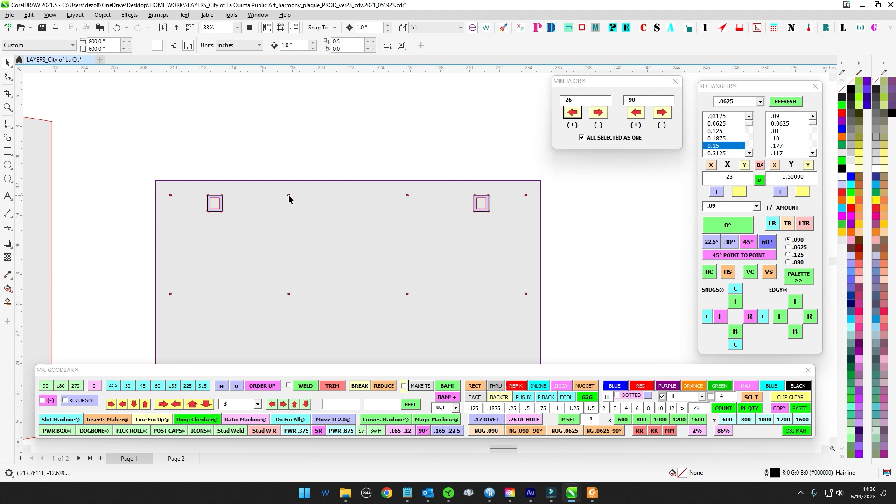Now what we're going to do is take this, and I'm just going to hit make through shape, and it's going to make a piece that's already named. Now these need to be through holes. These holes are being tapped for 10-24. These need to be through. So I'm going to go ahead and do them all again. And I'm going to do a .22 hole. This is a good clearance hole. 0.22 is good for number 10 for the way we do things.

So I'm going to hit this, load it up as OG shape. Green means we're good to go. Then I'm going to grab this, pick the name of it right here. Then I'm going to grab all of these, hit go. It's going to find them. So I'm going to copy to these. I'm going to erase the original, apply to all shapes. And now I have 0.22s on the backer piece.

So now the backer piece is laid out symmetrically, so we don't need an arrow. If we did put an arrow though, you would see it, and we don't want that. So I'm not going to put a reference kiss arrow, but sometimes if it was necessary to know which way was up, I would put one, and it would be ground into the aluminum. But instead, we set this up symmetrically, so there really is no up or down.

So that's all good. Also, what I'm going to do, just for safety's sake, I'm going to radius these corners. I'm going to grab my radius machine here that has my hot buttons of things I like to use a lot, and I'm going to put a 0.0625, a 16th round on that just to safety it off for people. You know, try to respect your neighbor.

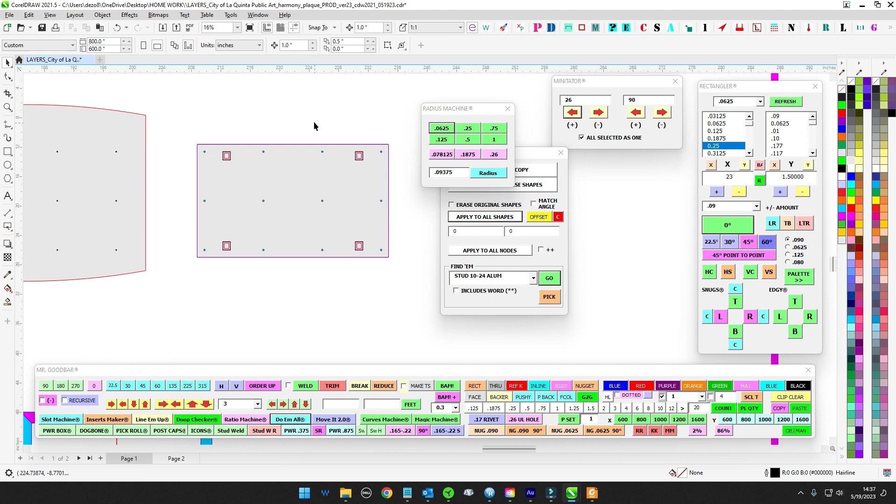All right, so this piece is ready. We've got our island fills, we're good to go. Frames are laid out, pieces are laid out. I think we're all set.

So now that we've got everything built, we can get rid of all this. I don't need 26 anymore. We got this ready. So next is to set up the route files.

So I'm going to go to 'hi, my name is,' and create pages for this. So what do I have? Really all I have to route is 1/4 inch aluminum, so 0.25 aluminum, we're going to call plaque faces.

Now, this brings up a good point that I'm going to break these into 2 separate files. Normally, because this is quarter material, I make a DXF file based on material, so I would send this as one file and say, boom.

But the thing is this needs to get engraved on the other side, and it needs to be beveled, and engraved on this face. But I also need to have these holes on the back side. So this means that this plaque needs a double process, which really stinks. We don't like to do that because it's a pain in the butt, because you have to fixture it and then flip it and make sure it's exactly where it is.

But I've already talked to Route, he's down. So what I'm going to do is send this separately, because while he's engraving this, I'm going to ask that he routes this first and makes sure it gets put into production, because fabrication can go ahead and build this frame separately. Really, all we need for this is to tap it, and then it goes directly to paint. We do not need the face in order to build this frame.

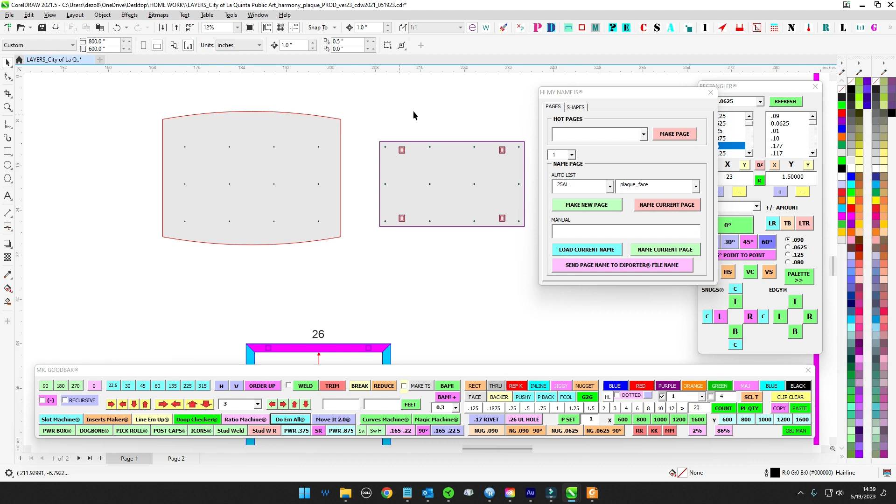Now, this brings up a point where obviously there's an up and a down on this. And once this thing's screwed down to the back, you won't see anything on the back of it. So I am going to put a reference arrow for anyone else involved, so they know which way's up on this thing. So this is going to be the back.

Also, I'm going to set up some notifications here. So I'm going to make this a 10, and flip it like this. This means it's upside down. So this is mirrored this way, and this is actually mirrored too. Technically, it's upside down as well. Yeah, we are looking at the back of it.

So that way we're really clear about what's happening, and so that way we do have a clear up and down, because you can see where there's all this room here and there's no room here. So anyway, now we're good there.

Yeah, let's do it. So what I'm going to do is make a plaque face page, right? And then I'm going to go ahead and do the plaque frame backer. I'm going to make a new page. There we go. So I got the plaque frame backer, and I actually have the plaque face. I'm going to put the plaque face first.

Come on, there you go. And then plaque frame, okay. So now I can just export these separately, but I'm just going to copy them both, let's just save time. Copy. Hit paste, yeah, we're done with you. Thank you, and paste.

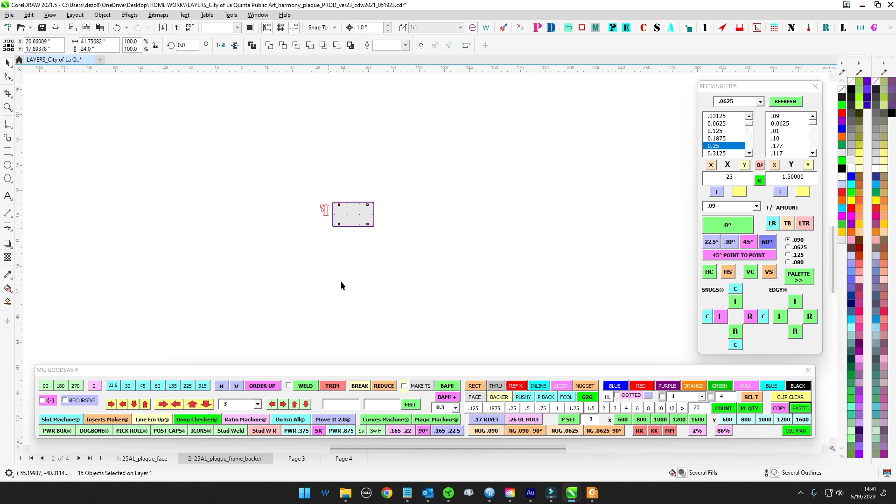So plaque frame backer, that's this one, so we're going to get rid of that. And then we're going to do plaque face, we're going to get rid of this.

Because what we're going to need to do with plaque face is actually create this side as well, that has all of this basically going to be engraved. Now I'm not really read into how the engraving is going to be, it's more technical, it's more about how the router guy wants to do it, or the router team, plus they have to bevel the edge and all that. So I'm going to make a note that he needs to get in touch with the designer or the salesperson to make sure they know exactly how deep they want this, what they want.

Also, paint department needs to deal with it, because they have to paint it and then engrave it, and it has to be cleared and all that. So that's why I'm making this a separate file, so that way this thing can be routed, and then they can mess around with this.

But what I'm going to do is I'm going to take this and this, since these are two different sizes now, I created a different animal. I'm going to get rid of this, and make this like that. And then I'm going to copy this, and like that, there we go. Now I'm going to send this to the back, and I'm going to ungroup to get rid of all of that. I'm going to get rid of these little nuggets, any kind of nuggets like that.

And then what I'm going to do is I'm going to take this, and we're going to make that purple - no, magenta, you know who you are. Okay, so this is essentially all the engraving we need to make happen, and that is lined up to our matching full official face. So I'm going to...

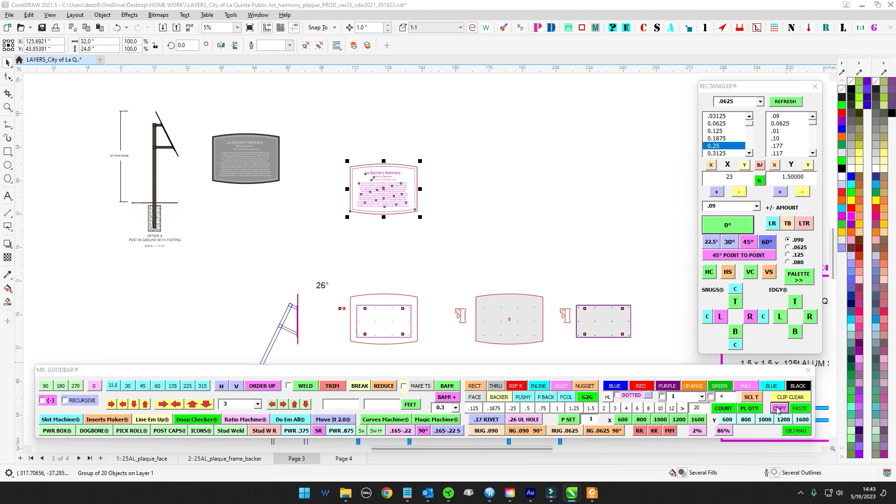So now I'm going to copy this and bring it up to the plaque face. And then I'm going to go ahead and... there we go. Okay, so this is the back, this is the front.

So this is the side that I'm confident - if he routes that, we're all good, that's what I need. This side, it's obvious that it's engraved, but I just want to make sure, I'm not totally read into the best way of doing this. So again, I'm going to make sure he understands that he wants to check in before he gets all crazy and starts routing that.

But we have this backer, please go ahead and route that, and we have all this, and we're good to go.

There we go, so time for layers. So I'm going to get my layers, machine info, words - all these guys are good. I'm going to have an on-center shape there. And then I'm going to do a custom layer.

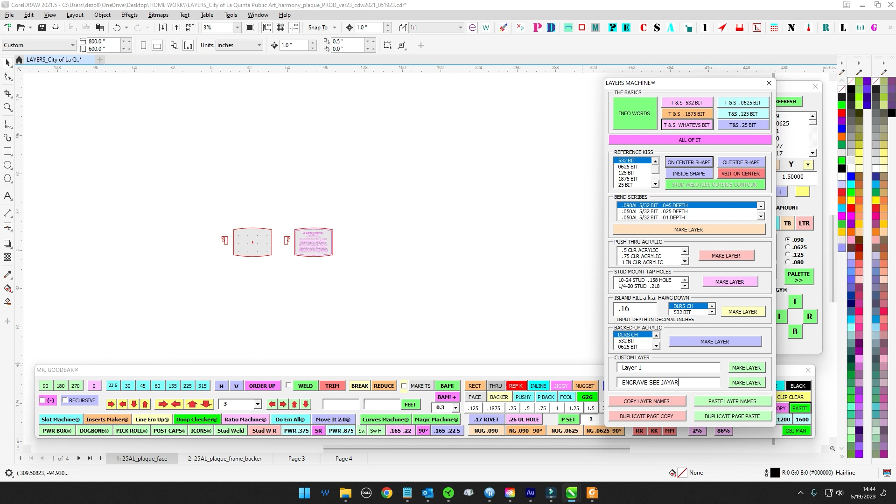And then we also want a bevel, so I'm going to copy this. And then I'm going to rename what I just did. And then I'm going to make it purple. There we go, so I'm going to send that to the layer for bevel, but I'm going to make a layer called bevel edge. There we go, make layer.

So now we have bevel edge, we have engrave see Jayar for deets, reference kiss on center. So we're filling that out, looking good. I think we have everything we need for that. We're going to do info words, quarter inch, looking good.

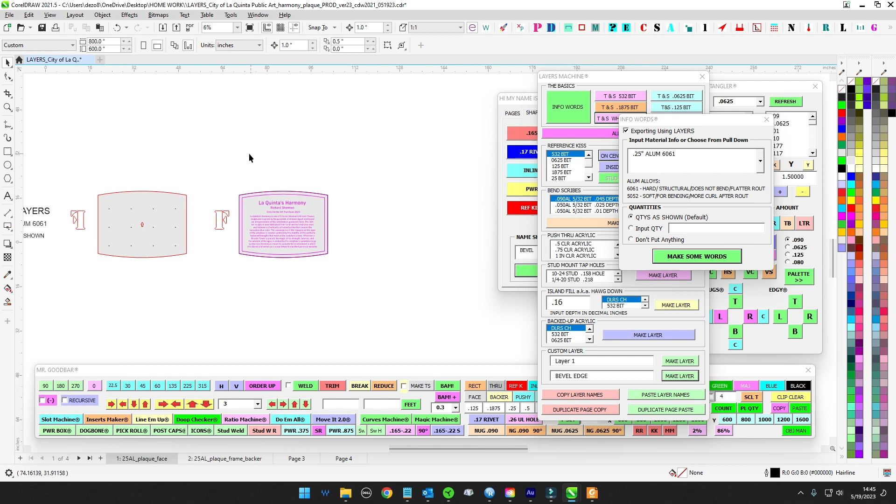And then I'm just going to go ahead and on the info words section, I'm going to type in some info here - see Jayar for... I want to, there you go.

Oh yeah, we got studs. So layers, layer machine, come over here, stud mount tap holes, make layer. There we go. All right, so we have a layer for that, we have a layer for that, I'm good to go. We'll come back and clean this up.

So now same thing, info words, throughs and shapes, whatever. We have no reference kisses. We do have island fill though. Our island fill is 0.0625, and we want to do, it's not dealer's choice. I know that we need a 3/16 bit to clear that. So I'm going to go ahead and make that layer. There we go.

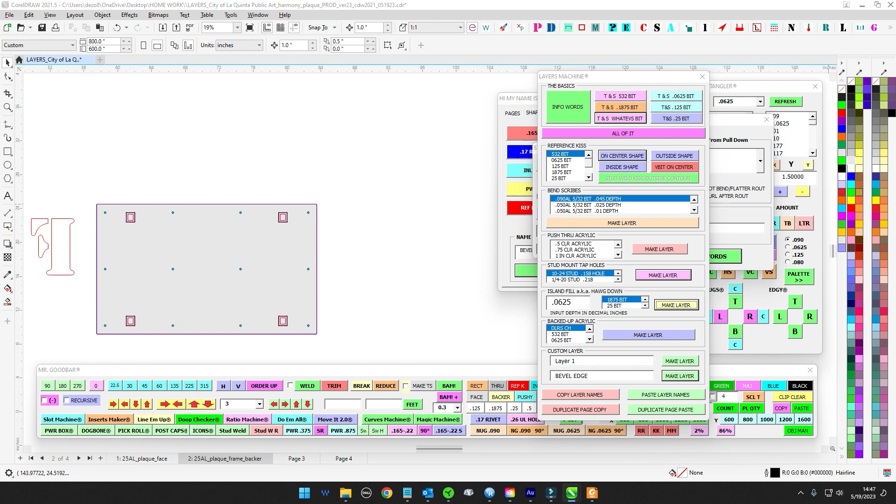So we're good to go there. But I think we're all set. So we hit our info words. We're still dealing with aluminum. And then I want to get this, that's better.

And then what I want to do is leave instructions for. I'm going to do route first for, let's see, route first for fab. Make frame. Make frame. Let's see, get rid of all this. Don't need that. Let's see.

So I want to make these a little bit smaller. Thank you, sir. Let's see what I want to do. Make this like a 2. Yeah, that's good.

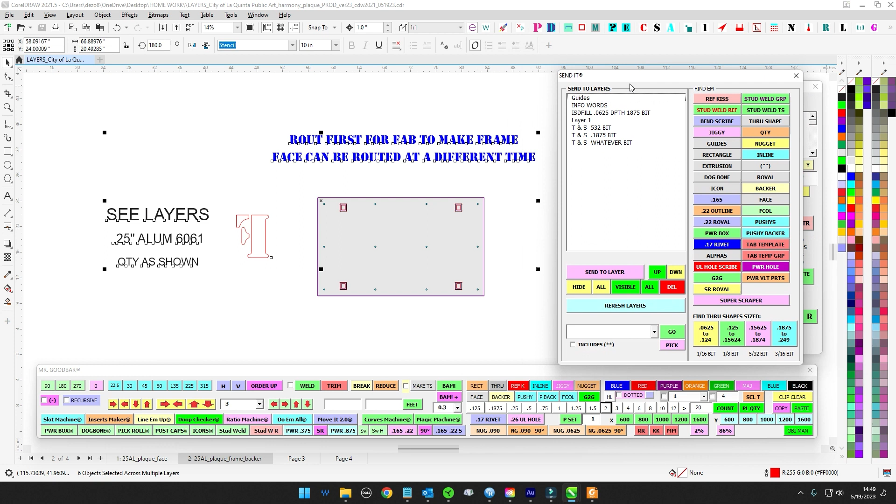Grab this, I'm going to grab these and make sure these are all on info words, so that way they can turn it off like that and it goes away. And then I'm going to grab these. I'm going to hit Super Scraper and see what comes off. Yep, worked out perfectly. So these stay. These stay. I'm going to go ahead and hit Dupe Checker.

I'm going to hit Position and Size. Looks like there's nothing, we're good to go. So now I'm going to grab these. I should have 4 objects. I'm sending those to Island Fill, hit Hide. And then I should have these. I'm going to go ahead and hit 3/16 bit.

These holes need a 3/16 bit to get through. So I'm going to send that to the layer. And then this can be whatever he wants, dealer's choice. So now I hit delete, gets rid of any empty layers that I'm not using. Hit visible all, we're set. This is now ready for a DXF file.

Now we're going to go here, clean this up. So I'm going to grab everything that's supposed to be on info words first, and I'm going to send that to that layer. Did I end up with 3 info words?

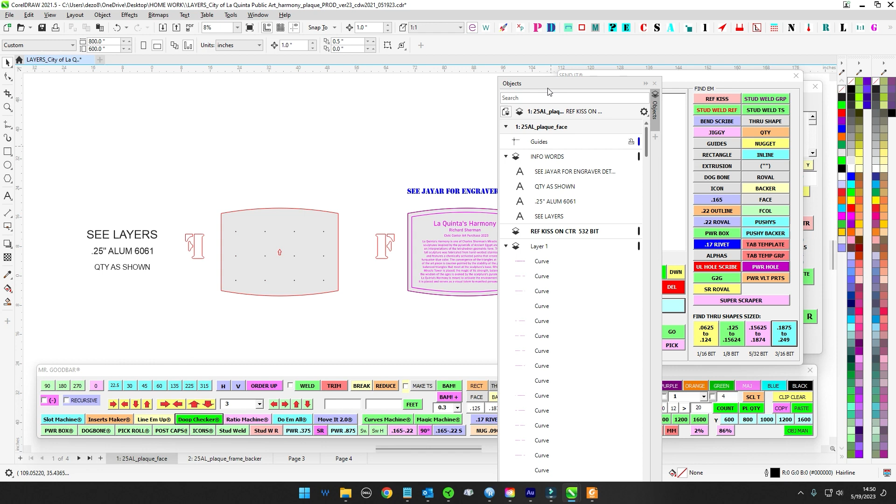We're going to go ahead and go over here to our objects manager, and we're just going to get rid of these. We're just going to delete each of these because these are empty. Don't need these. All right. So now if we refresh, now that's the info words, that's the real info words. We had some imposters, how'd those get in there?

So I'm going to send that to info words. I'm going to hit that, hit hide. Good to go. I'm going to go ahead and do my dupe checker now. Yep, that's a false positive. It's fine. So what I'm going to do is hit this.

I'm just going to go ahead and get this out of the way. That's going to bevel edge. Hit hide. I know that these are all going to the engraver, see Jayar for deets. Hide. And then this is throughs and shape. Send that, hide. These are bottom taps, but I'm going to go ahead and send this reference kiss to reference kiss. I'm going to go ahead and hide that.

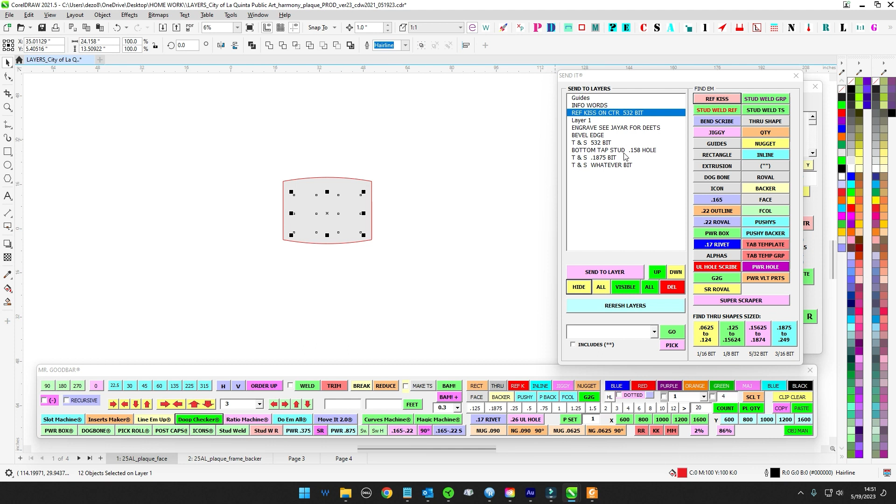Go ahead and send this to bottom taps, hide those. And then I have throughs and shape, that goes there, hide that. So now I go ahead and delete everything that's empty.

And then I hit visible for info words. I hit reference kiss on center. I have a little arrow there. I have all the engraver stuff, that's right here, see Jayar for that.

I have a bevel edge, that's right there. I have bottom taps, that's right there. And then whatever's left are the 2 shapes. So it all checks out. We're good to go. I already did my dupe checker.

We are ready for DXFs. So now I grab my exporter here. Let's hit save. What I like to do first though is I'll go ahead and just make sure nothing is selected. Nothing's selected. If you hit reference PDF, ref PDF, it gives you a printout of the entire CDR.

So now the CDR is captured in a PDF file for the back shop guys to read. So they can go on here and they can zoom in on this. It tells them what size the frame is, all these measurements. What I'll probably do is I'll go ahead and bust this out into a separate PDF as well.

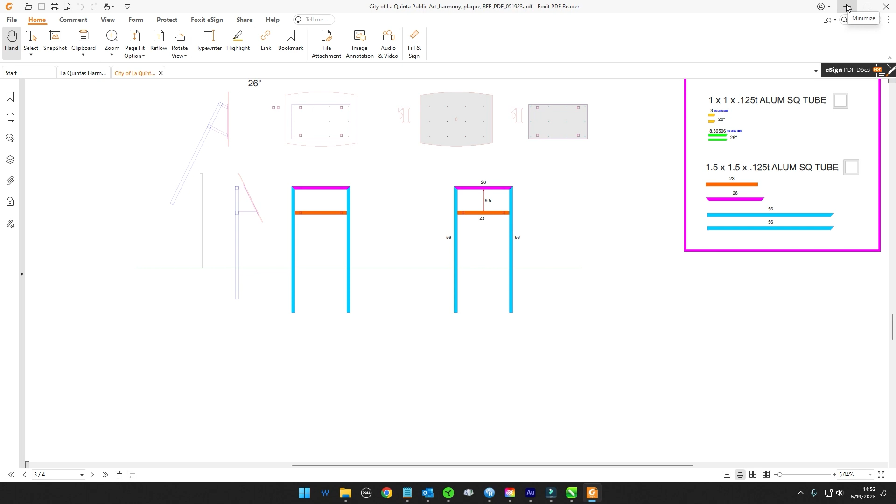I'm going to go ahead and do that here in a second. Just that easy. But while I'm here, I'm going to do my DXFs. So I'm going to go ahead and hit select. What it's doing is keeping this as the file name, and it's going to grab this page name and load it there. You can see where if I hit grab name, it grabs the name of the file. But then when I hit select, it selects all the parts, grabs the page name, and then exports DXF.

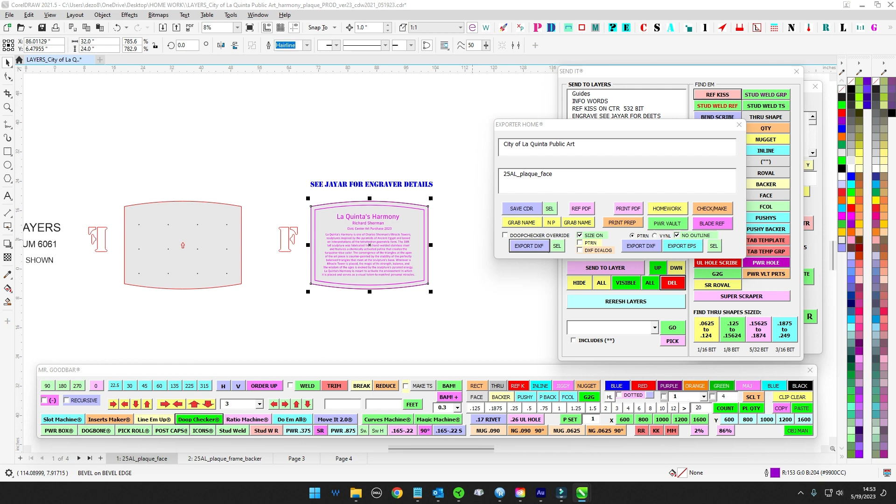So you can see where I have my DXF set, good to go. I'm going to go here, we're going to hit select. Looks like there's no duplicates and our DXF set. So now I got my 2 DXFs just like that, all named, all exported, all ready to go.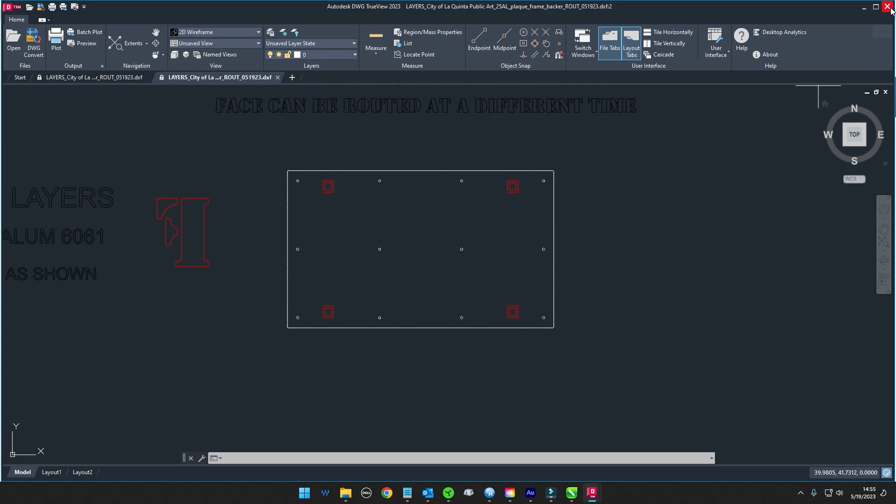And then I use the DWG TrueView, and what this does is gives you a third opinion, or second opinion, so that way I'm not re-importing. It's like getting a second opinion. You're getting something that's a native DXF reader, you're getting its opinion, and you can tell that it's all working. If something was hinky, this thing wouldn't be able to open it. Now I know you can just re-import into Corel, but when you're importing, maybe Corel's doing something to fix something. Whereas getting a second opinion from an actual DXF reader, you can get this free from AutoCAD. It works great, and that way you can natively open a DXF without re-importing, and you can tell if EnRoute's going to like it. Because a lot of times when we export something from Corel and EnRoute is angry, it's because something's up. So it's really helpful, because when you try to open it with this program and it won't open either, it helps you really troubleshoot things sometimes. So that's what I like to do with that.

So we're good there, we have our PDF there. So we have a couple things left to do. I'm done with that, thank you, sir.

What we're going to do is create these PDFs for cut list. So if I hit select, right, then if I hit ref PDF now, it's going to send a PDF with everything on it. If I have a selection, then it switches over to exporting just what's selected, and that creates an instant PDF of just this. So what I need to do is go ahead and add a name to this, as in cut list, to describe what this is. Now I'm going to hit ref PDF, and you can see just that quick, bam, it has exported a cut list. So it just exported what I need, and now the guys can print this and go ahead and see what's up.

Now I just noticed here, I like to be clear. I know I can assume the guys know that this is 45, but I left that off, so I'm going to go ahead and add that, just to make sure that everything is super clear.

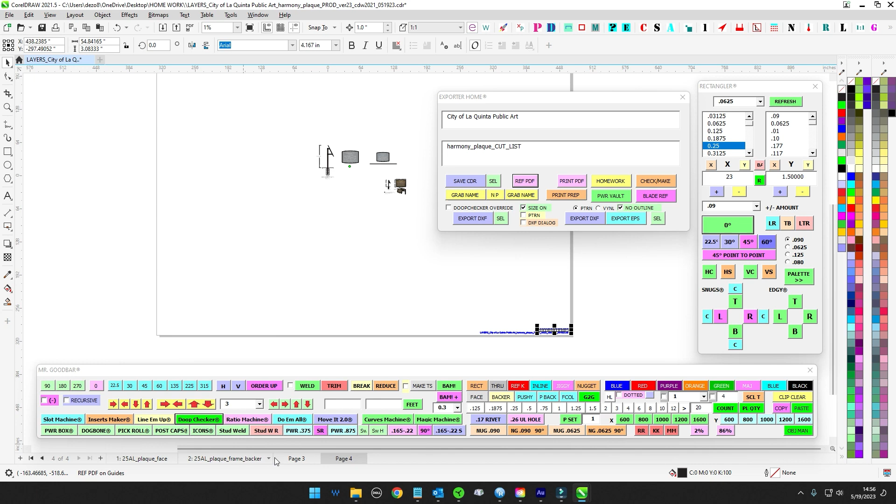Now I know this is kind of funky because I'm trying to let you see all this, but usually it's a little more straightforward because I don't have all this in my way. I have all of this stuff always on my second screen to my right. So if it seems like I'm clunking along, usually I don't have to keep coming back to this screen for this stuff. It's almost muscle memory when it's over here on my other screen. So I kind of apologize if it's sort of clunky, with all this in the way.

Normally this is my view and I have everything on my other screen. So what I'm going to do is take my Launchpad. Again, Launchpad just stays over there, but I'm bringing it over here so you can see it.

45, and then I hit the degree button right here. Now I'm going to hit go. I can just plunk that there. I'm going to bring this down to a 2-inch, and that's clear.

The guys would know, I'm sure they know, but what are we doing? We're assuming, and we don't want to assume. That's agreement number 3: never assume. All right, so now we're good.

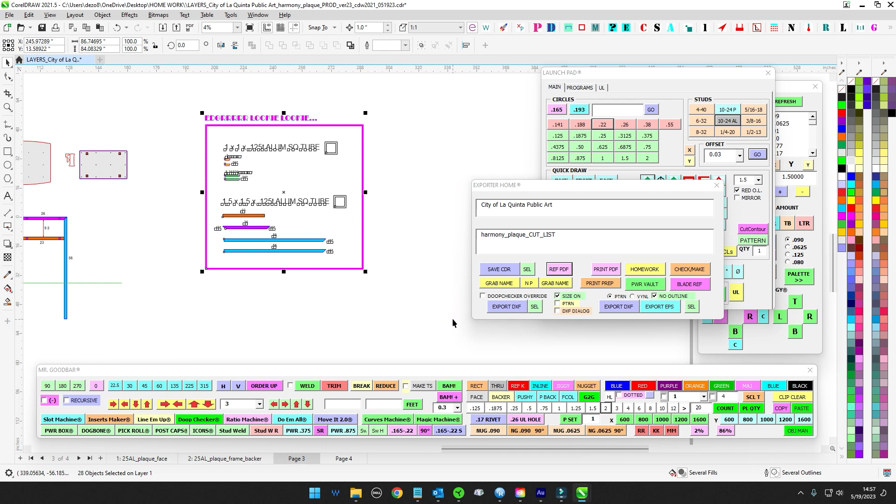This is how easy it is because now I just need to remake this. I go ahead and reselect it, and it will automatically overwrite just what we just did. It doesn't even ask, it's just a save as. So just that quick, I made a little change to make sure those are 45 and they know it.

Clap your hands, so we close that, we're good. I don't need Launchpad over here, we'll keep this here. So now I did a cut list and I realized I need to have a layout.

So I'm going to take this, come down here, and make a layout. If I hit BAM plus, it puts a thing around it that's a percentage bigger than it is - this right here is 0.3. I like this, so instead of cut list I'm going to rename this to layout, then hit ref PDF, and it just created another PDF. You can see my PDFs stacking up, and this is what layout looks like.

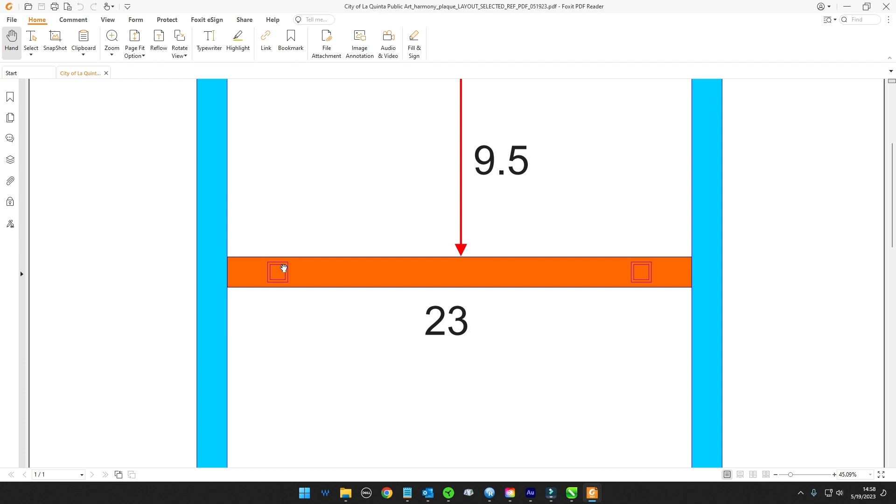So these guys are going to get this. Oh, I need to tell them where these go. Duh, getting a little ahead of myself, getting all excited showing you guys how it is.

So we're going to go ahead and lay that out, and get rid of this. See what I did there? I had this laid out just for PDF, but because this is now rubbish, just get rid of that and go back to where we were.

So where these guys are, I think I'm going to make these - what can we see? If I make those white, I like that. So we can get this out of the way. Like I say, this stays open over here, but I got to get it out of the way so you can see what's up.

So what we can do is, instead of making this too crowded, I'm going to make another one over here that doesn't have this stuff, and that way it'll be just dedicated to these guys.

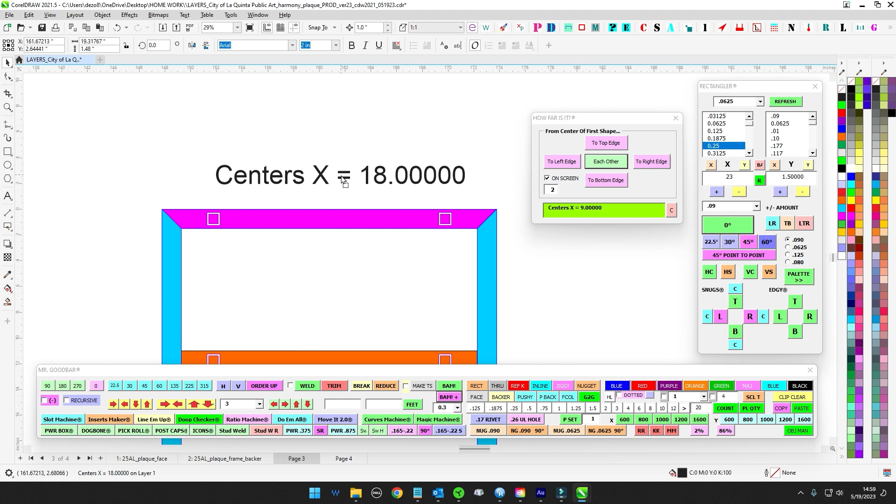So now what I can do is on center. If I take my on center thing here and hit on screen, it will put that on screen like that, because I know this is 18 inches on center. So maybe I'll do a 1 inch here, and if I do this, it'll do on center Y like that.

That could work, but these guys don't know Corel and they don't know what X and Y mean sometimes. So what I might do instead is take a rectangle, go in the center there, and make sure that it's 18 by 11.

And then if I hit my break apart, it'll break this apart, and I can just get rid of these. If I duplicate that and run that up, and duplicate this and run this up, this gives me a dimension tool. I mean, I know they have the dimension tool, but it's kind of rubbish - I don't really like the dimension tool. So this, I kind of made my own.

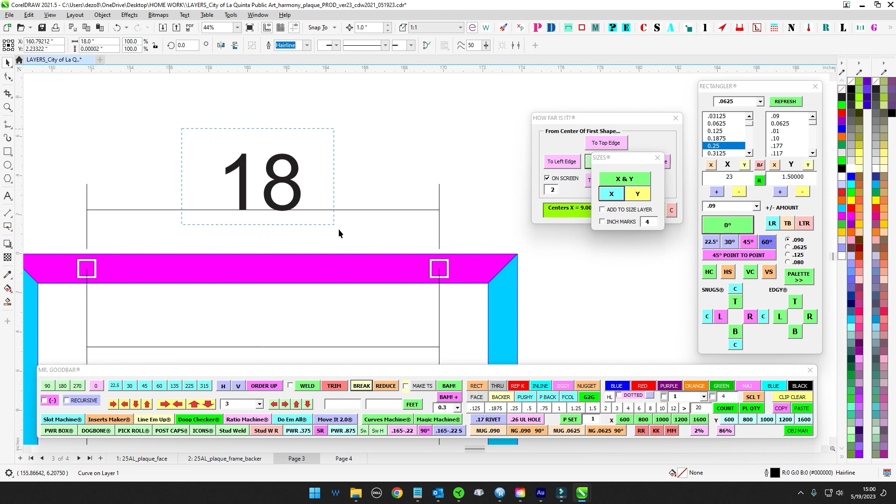So I can just take that, and now if I hit Sizey here, call him in, I got 18 right there. So let's hit this with a 2. We're good to go. Get rid of that.

Also, what I can do here is go dark blue, and because these are of the rest of the, on this one, these don't matter, I'm going to go ahead and no fill these. There we go, I like that. So there's 18.

What we can do here is put that back on center, and then I'm going to use these for the on center this way. And then I'm going to bring this over here, and I don't need that - thank you for your service.

That, like that - that's blue. There we go, and then I'm going to hit this for Sizey - there's 11. Hit that for 2, right? Yep, center that up. Okay, so this is 11 on center, 18 on center.

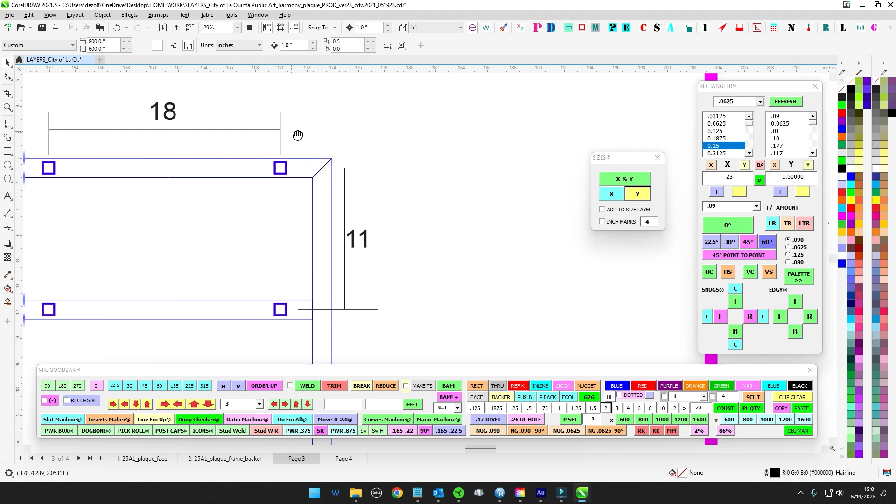Looking good. And then sometimes I'll just do this, you know, just to make it easier on them. Sometimes it's easier just to know the insides. So I'll hit break up.

You never know, right? Because it's so easy.

18 on center, 17. And it goes up to there. There's my Y. There's my 2, and my 10.

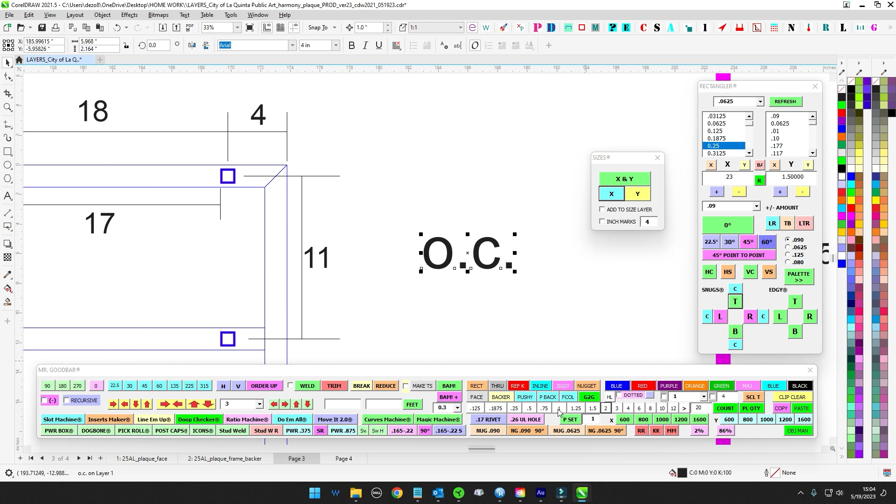Yeah, I think that's clear enough. I think the outside is clear enough. All right, so there you go. I think we're good. 11 on center. This is on center.

Let's say we'll give them an equal typical. How about that? Just to make sure it's super clear.

What I'll do is I'll just do a typical, drag this in. I have a symbol of this, and then I'll just bring it down a little bit, just like that. And then we just do equal. Like that. 2. Let's do 1.

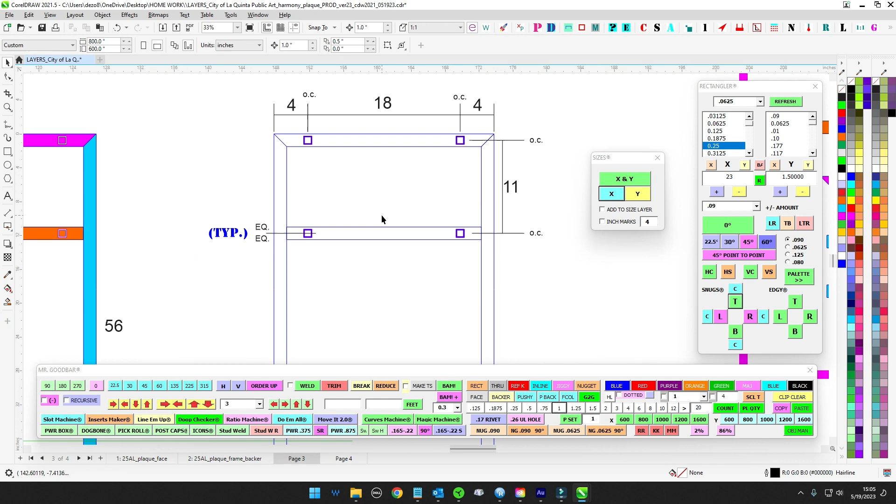Yep, that works good. So that's typical for all. Equal there, equal there. I think they get it. That should work.

So now what I can do is take this, go ahead and put a bam around this. There we go, so that's my layout. And now I can come over here, hit my reference PDF, and we'll see what that looks like. There we go, looking good.

So now we have this laid out on center, tube on center. This here is how you lay out the frame, nice and clear. So all this is going to get emailed to everybody, and that way it's all nice and clear. Now, because I added this, I want to redo the whole reference PDF because I added this layout.

This didn't exist. So I'm going to go ahead and just back this out, right? Don't select anything, hit reference PDF again.

And what it's going to do is just overwrite that original reference PDF. And now the reference PDF has everything I need, right? It's all back here, we're all caught up. So just that quick, I updated the reference PDF without having to reopen, resave, all that. So 2 DXFs, reference PDFs ready to go.

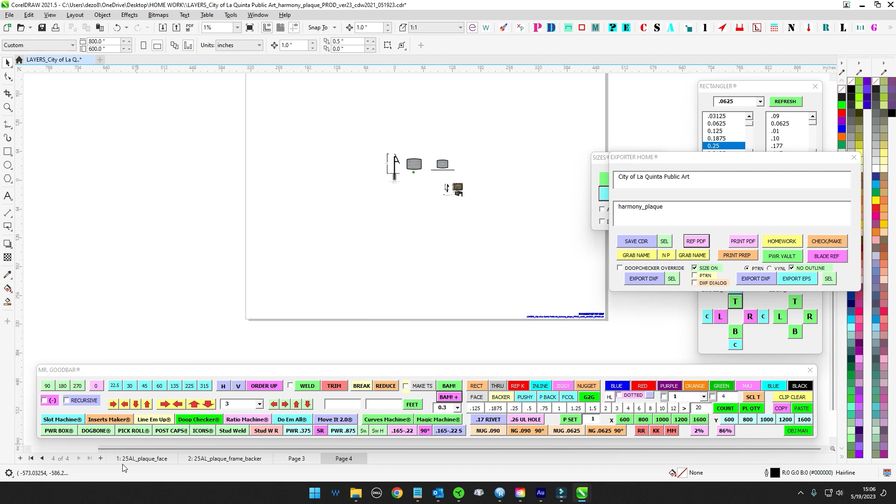Last thing, now we create print PDFs to print these 2 pages out so that way they can inventory it as it comes off of the router.

So again, I'm going to do grab name, make sure that I have just the file name selected, and then I'm going to hit print prep. And that's going to go ahead and resave this whole thing. The CDR gets renamed as its own CDR.

So I'm no longer messing with the original CDR, and I have print with all of this here to create a print-only version. So I can do whatever I want because I'm going to trim it.

So then I hit this, and I grab printer ready, player 1 ready right here. And I want to get rid of pages 3 and 4. And I hit trim. And now it's taken the stuff that I want to keep and put it on an 11 by 17 tabloid sheet.

I hit checklist, it puts a quality control checklist up in the corner. And now all I got to do is hit print PDF, and it names it. And now I have a print PDF, which is just these files here.

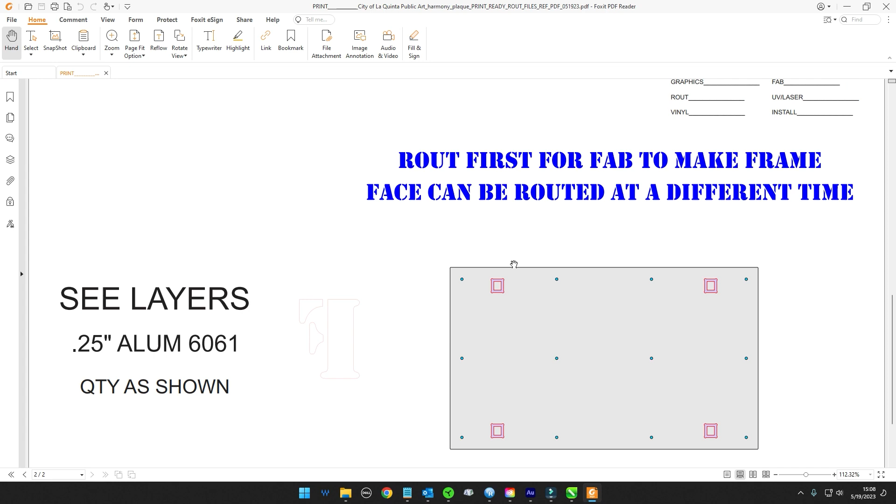And the guys use these for inventory as they come off of the router. So they can look for this part, and then they check it to make sure it's all there. So we're good to go. So we have our PDFs here, cut lists, and now we have a print PDF, and we have a DXF.

So now I'm going to distribute this to the server. I'm going to distribute this to all the people, and we're going to make ourselves a plaque.